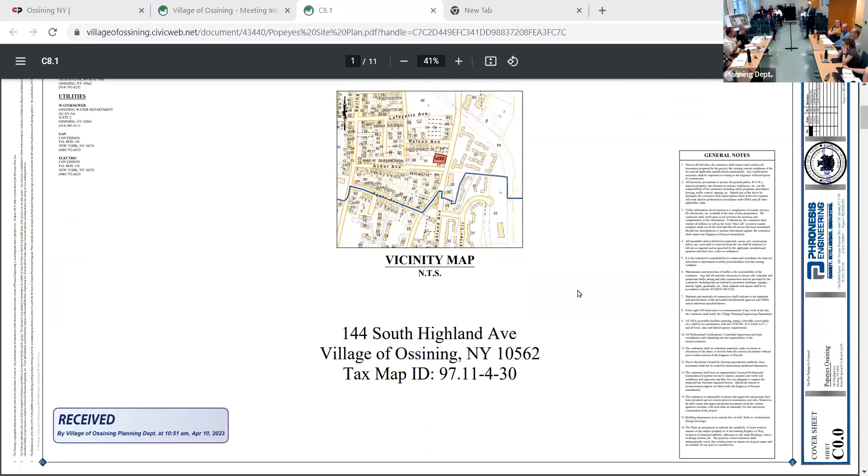Chairman, members of the board, my name is Anthony Stankinelli. I work for Phronesis Engineering, located at 1601 Veterans Memorial Highway, Islandia, New York. I'm here today to represent Popeyes in Ossining. We prepared the civil engineering plans for the project. I just want to state that the exhibit we brought tonight is just a pretty picture of the site plan that is up there. So no changes, it's just the bushes are colored and there's an aerial behind it.

As you probably already know, this site has an existing hair salon, jewelry repair, and nail salon. It has a second floor. This doesn't comply with many of the bulk setbacks and regulations. So we feel that the proposed Popeyes greatly improves the site, meeting all town code and bulk requirements.

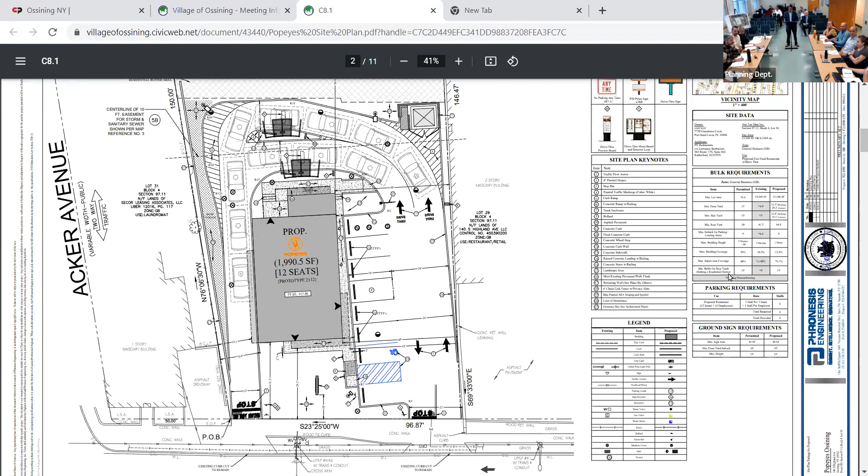The proposed site has 12 seats, a 2-lane drive-through with 2 order boards, 8 parking stalls, and 11 queuing spaces. We have great circulation coming into the site, one way in to get to the drive-through. If you want to eat, you have 8 spaces to park, eat, and then come right out of that same entrance. Going through the drive-through, you have 2 lanes, 11 queuing spaces, 2 ordering points, and a pickup window, and then one way out.

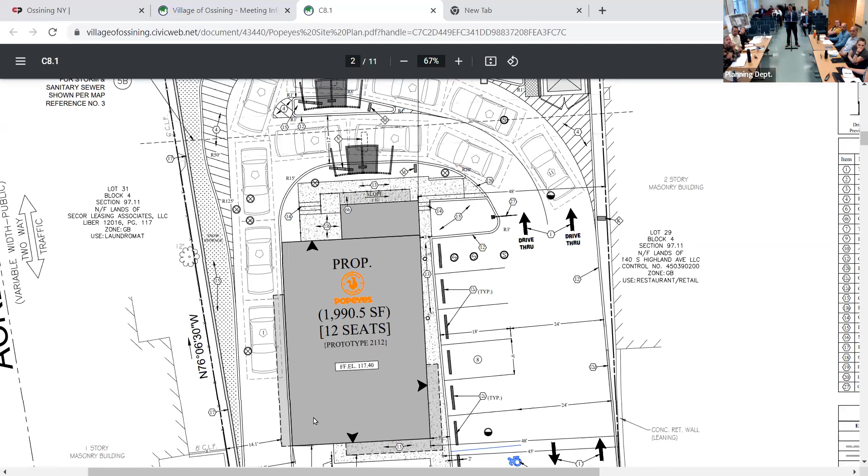Today, a lot of these fast food restaurants are doing a lot less seats. They're seeing more general traffic just coming through the drive-through and pickups. It's not shown on here, but you can see that overhang where the drive-through window is, where you pick up your food. There's actually a space in front of that - you can see how long the overhang is - for anybody just picking up, like a mobile order, so they can pull up, get their food, and leave.

We're providing brand new landscaping, regrading the site, proposing new retaining walls, landscaping, new lighting, new sewer connection with the grease trap. We understand we need health department approval, and we're also going to need New York State DOT approval. There have been some comments from the consulting engineers that we reviewed. We're confident we could address every comment. There was nothing major that we saw.

Some of the comments referred to the curb cuts on the site. We were trying to save the existing curb cuts because I'm sure you all know how long and difficult it is to go through the DOT process. So that was our intent with the drive-throughs, but it's really in their hands. When we submit to them, they're going to tell us sidewalks cracked, your curb cut, we want it smaller or larger. So we're going to be subject to the DOT. That submission, I believe, went in last week, so we're going to wait to hear their feedback.

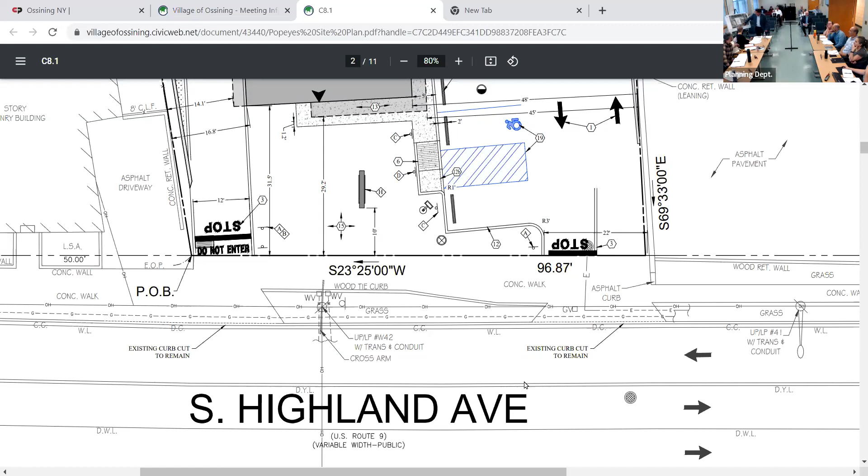We'll also take into consideration the comments from the consulting engineers about, I believe it was on the north entrance here, the existing retaining wall on the neighbor's property. There's about a 1 to 2 foot gap from that retaining wall into the drive aisle. We left it alone, that's what exists today. We didn't want to start changing the curb cuts, but again, it's all going to be subject to what the DOT wants to do.

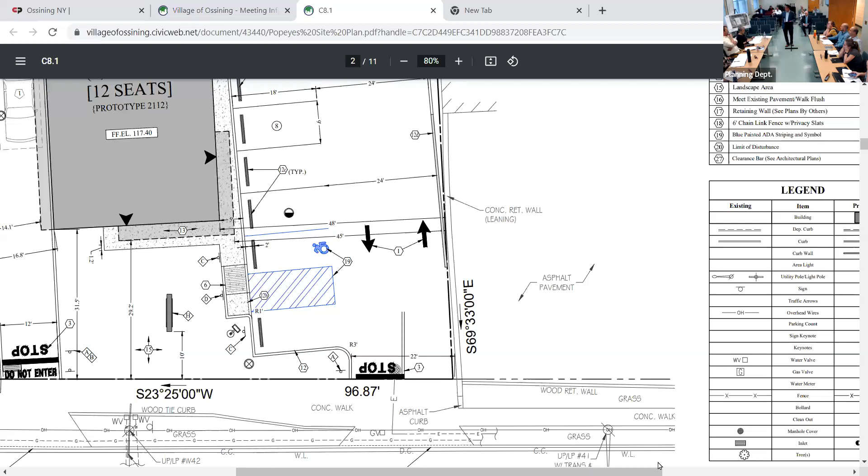New drainage system - with improvements, we're proposing a jellyfish water treatment unit, so the water's sediments and any contamination will be filtered before entering the positive drainage system on site. I just want to add, because one of the comments mentioned that drainage system was in an easement - the easement is the sewer main that runs through the site. The ordering boards are outside that easement line.

This is an exhibit, but if you go through the site plans that were submitted, there's a light - you see it better on the screen if you zoom in really close.

You see the sewer line there in the back of the store, going right through the middle of the two ordering boards. There's a 10-foot sewer easement, 5 feet on each side of that sewer line.

So one of the comments said that the ordering board was in the easement. It's actually just an overhang. We were also concerned with the pipe too, since we didn't know where those foundations were lining up. The drainage pipe, yeah, there's a footing for the ordering board above it, but the drainage pipe is 10 feet below, and the footings are not as large.

Yeah, that was my question. The thing about the easement was, because it's public drainage, it's not in an easement, but I got confused because the label said sanitary and stormwater easement.

So we met the village DPW out there on site. They didn't even know some of this existed. We went there, we inspected it, we talked to them, and we came up with the plans. That's really it, but I'm here, I could go address comment by comment if you like from the consulting engineers, but we're confident we could address them and get the revised plans back to the town.

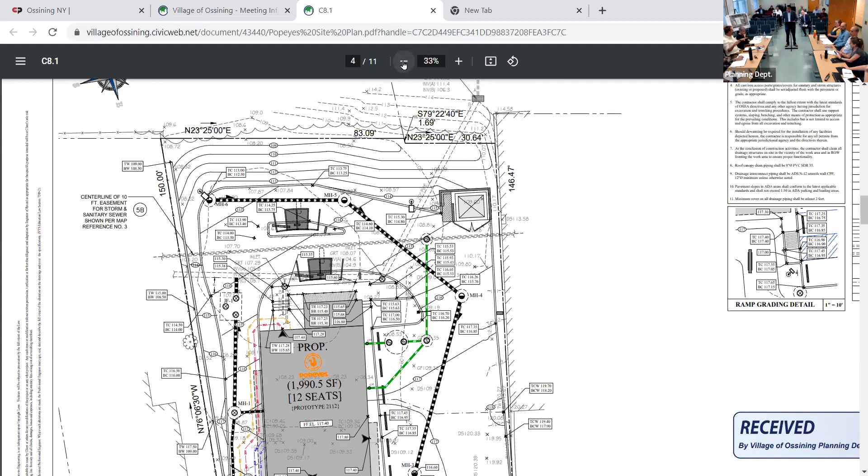Keep everything happy. I think it'd be helpful for us also to look at all of the different components of this project before we deliberate. So are you going to be presenting the BAR component, or is there another consultant who's going to be showing us the outside of the building?

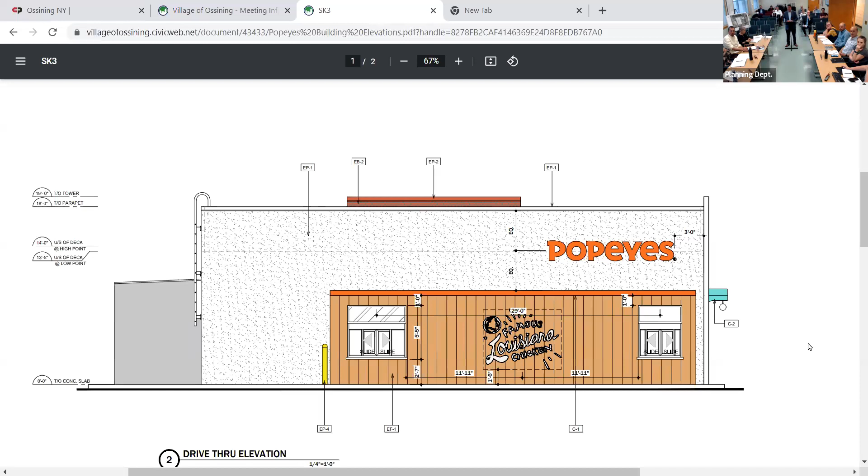So some of the comments was, so we do have the architectural elevations that were submitted. Basically, what we asked them to do was show a little more detail, call out all the different colors, call out the material types. We only got the comments yesterday, and the architect did it today. We actually emailed it over to planning at 4 o'clock today, so it probably didn't make it, but it was electronically submitted today.

So I think it would be helpful just to get to guide our conversation. I know that there were memos issued both by Valerie and Tony. Just a couple of the main points, main issues that we should be focusing in on. Maybe I'll start with Valerie, since I think that's kind of bigger picture, and then Tony.

Sure, so just a couple things. We already mentioned the county referral, we'll be undertaking that this month. For the BAR, we noted that the materials listing and colors were missing from the application, but the applicant said they submitted that, so that should be taken care of for the following month. The New York State DOT, the applicant already noted that.

Just a couple other things, the lighting, we noted there was some encroachment, so I'm sure you'll adjust the lighting and send that back next month. And then the signs, this is something that probably needs to be discussed with the building inspector. We spoke with him and noted that we were raising this issue, so speak to him and figure out exactly what's needed in terms of signs. If ultimately Popeyes wants to keep all those signs there and they don't meet the code, you might need a variance, so we're just raising that.

And then a couple other things dealing with the landscaping and lighting, as well as parking and loading. There's just some requirements in terms of drive-through facilities, so if you wouldn't mind responding to those and making sure that you meet and conform to those standards. Absolutely, thanks Valerie.

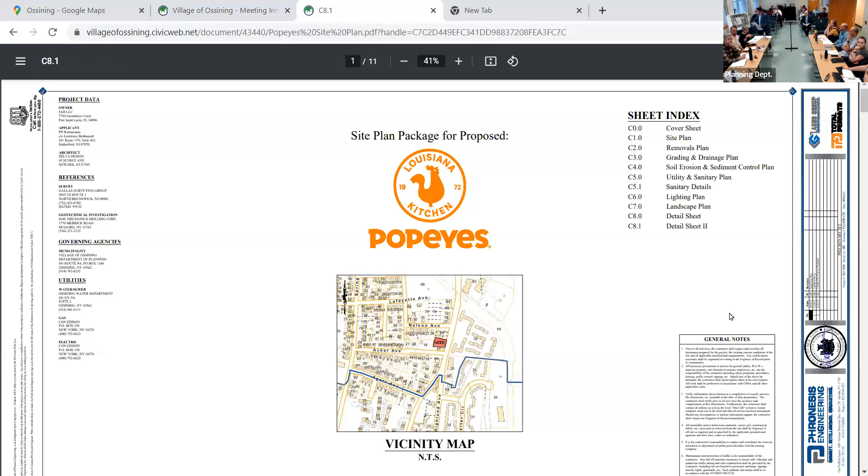I don't think this is on the site plan we're looking at, but can you talk about this green landscaping that's in front? What is that, outdoor seating? I don't know, if it's on... this is just a pretty picture, but it matches the landscape plan. And the landscape plan calls out all the different shrubs and grass areas. That's probably a better, more thorough and accurate plan to look at. This is just... so it's sort of a plaza, with some plantings or?

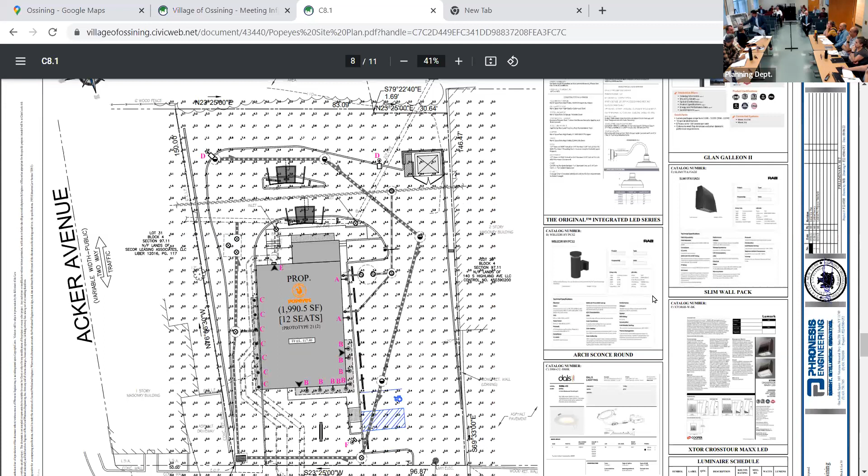There's the sign, oh my, the sign, right. So we did a couple of low lining shrubs around it, and it's just a grass area. Oh, that's some nice grass, shrubs, yeah, grass, yeah, not a plaza. Okay, everything's called out on the landscape plan. I see, okay, I wasn't sure.

That sign is not shown on any of the building elevations. No, the building elevations only show the building signs. But there is a signage table on our site plan for the ID sign, and it shows all the compliance with the code, setbacks, height, and areas. It sounds like this, so the signage, I mean we can kind of talk about that right now, because I know we're mixing DAR and site plan, but they're interconnected.

It sounds like that's being looked at by Joe. So that sign, Joe already looked at. Okay, it's the actual wall facade, right. And we just talked, so right now you're allowed to have one sign, what does the code say? Just so we can have that as part of our conversation. Let's see if I can pull that up. And that's the elevation we're looking at right now, that's the Route 9 facing...

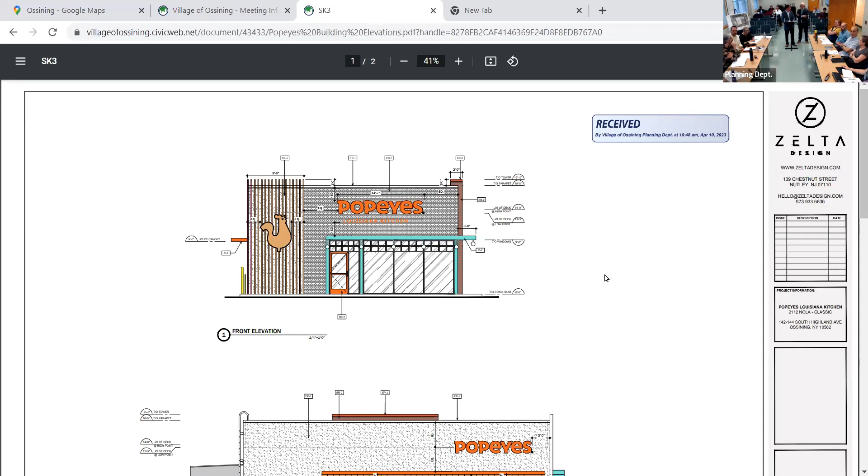Got it. Let's scroll down a little bit so we can look at both of these. So right now you're looking north, right? That's the south wall, sorry, the south wall. The drive is on the south wall there. So that's what you see when you're heading north on Route 9, and then that's the rear, right?

And the bigger issue is the definition of sign, because the definition also notes that it doesn't have to be the actual name, it could also be an announcement, advertisement, or symbolism. So that's where Joe needs to interpret. But that's for Joe to interpret, right? That's not at issue with this board right now. We'll talk to Joe and figure out, are we allowed one, are we allowed two?

Another question is, could we have a separate sign application along with the rest of the project? From this board's purview, that's meaningful from the DAR perspective, because that's integral to the facade, I think, from what we're looking at.

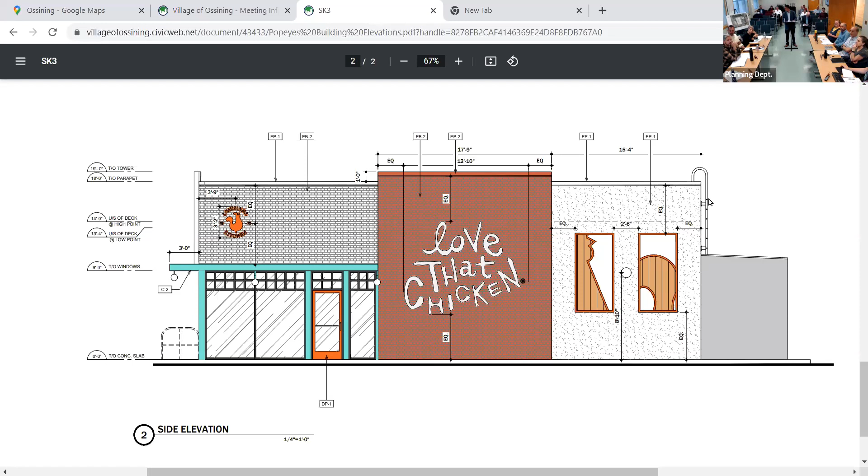The other piece I want to get clear on, I know Tony talked about it, is that there's a required driveway setback. It seems to me like we need a clear interpretation of whether or not the zoning board opinion will be required for the revamped drive. I know it's an existing condition, but it may or may not be.

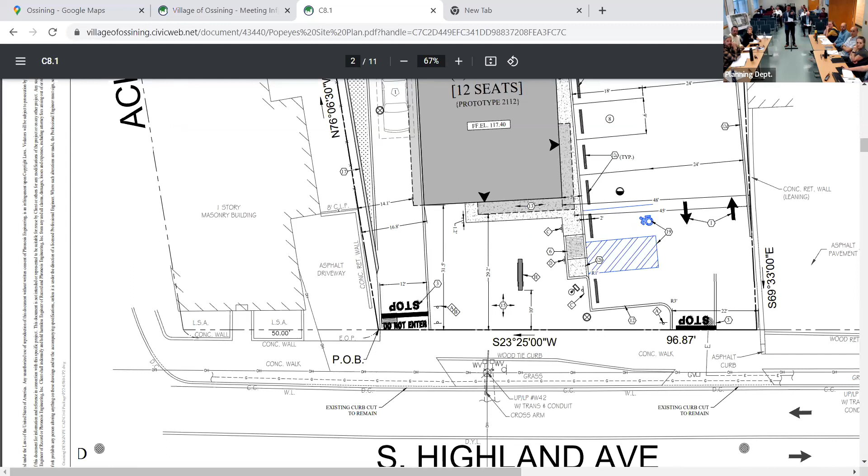Was it the northern side? The southern side, I think that's a new entrance, correct? No, they're all existing, we weren't touching that. We were using all the existing curb cuts. The one more towards the south is actually a shared drive with the neighbor. Okay, yeah, I see the asphalt driveway. So the DOT may have comments on that.

What's the level of traffic that you're expecting in the day? Based on ITE trip generations, compared to the existing site, it's less than 100 trips.

So what's the existing? Hold on, I've got a nice little graph. Weekday AM: existing 24, proposed 102. Weekday PM peak: existing 33, proposed 103. Weekend peak: existing 35, proposed 110. So the delta is less than 100, and DOT is going to consider that not a significant impact.

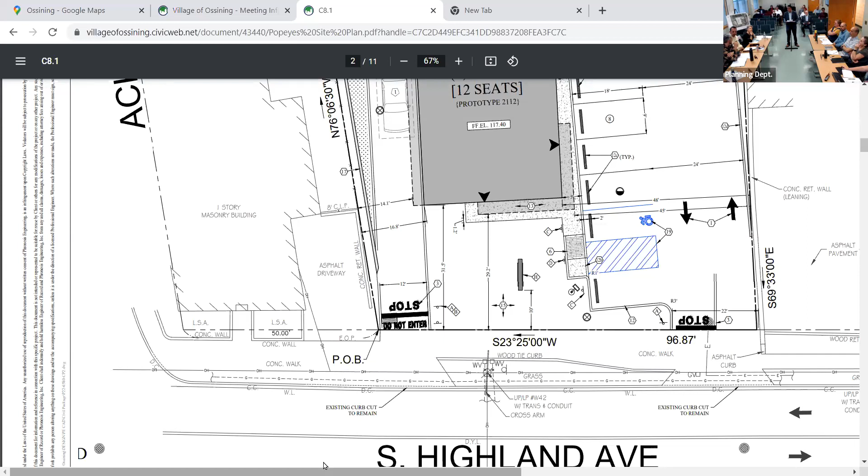Well, I'm really concerned about this because I'm familiar with the site. I use one of the tenant services, and getting in and out of that site, unless you want to turn right on Highland, is often very, very difficult. So even if the projections are that the traffic increase is less than 100 for different times of day and days of the week, I'm trying to envision how a steady stream of traffic is going to come in and out of this site.

More so getting in or getting out? Particularly getting out, if they want to go north on Highland Avenue. What's the average amount of time that a drive-through customer spends in line?

At Popeyes, do we know? Probably like 4 minutes, 2 minutes. Yeah, they have 2 ordering points, and now they have more people working the drive-through rather than catering to people inside, so the goal is to move them out.

I don't know if this is DOT's purview, but it's a concern I have. DOT is gonna tell us whether they feel this should be restricted to right-outs only or not. They're gonna do their own investigation and study, go to the site, and then come back and give us a whole laundry list.

That's typical process. Are they gonna be required to do a traffic study, or are we gonna accept just the traffic report they give? Are you gonna do a full-blown study? I don't even believe we received the traffic report. I'll do that. So there's no secret process here.

It's a type 2, but under site plan you can look at traffic issues if you're concerned from a site plan standpoint. I'm not sure what DOT is gonna ask them for. The threshold is typically if you're increasing more than 100 trips, then you should do a study.

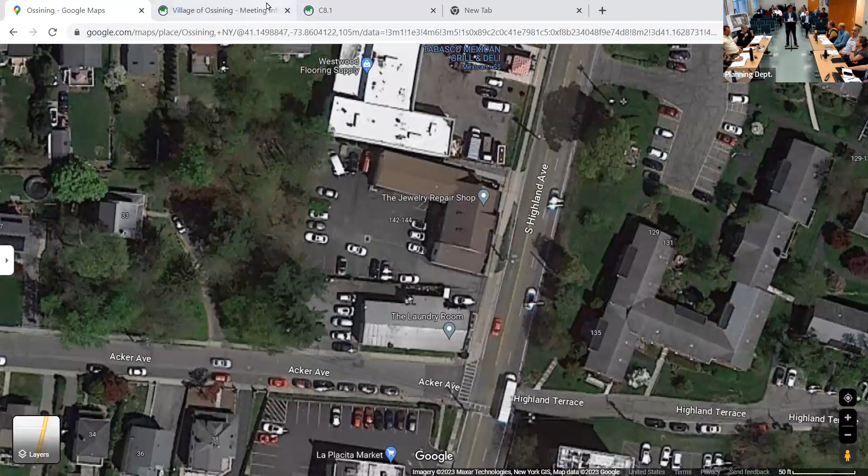I have a question about the parking. So you have how many spots? 8 stalls. And I know this is probably to the code, but where are employees parking off-site? How many employees are gonna be there versus customers, the parking calculations? So the required parking for town code.

So yes, it includes 4 employees, so there will only be—how many spots are there, 8? 8, so only 4 spots for guests. Correct. They don't anticipate a lot of dine-in customers today, most of the orders are mobile and pickups. That's why the building is only 1,990 square feet, with only 12 seats inside the restaurant. That's why they put the 2 ordering points, and we have 11 queuing spaces in the back.

Yeah, it's right, the code requires seats, not square footage. It's based on seats plus employees. I think it's 3 seats per, right? It is, yep, three seats. And then if there was ever a change, if the structure was ever repurposed or reused, they'd need to revisit the site plan and the parking.

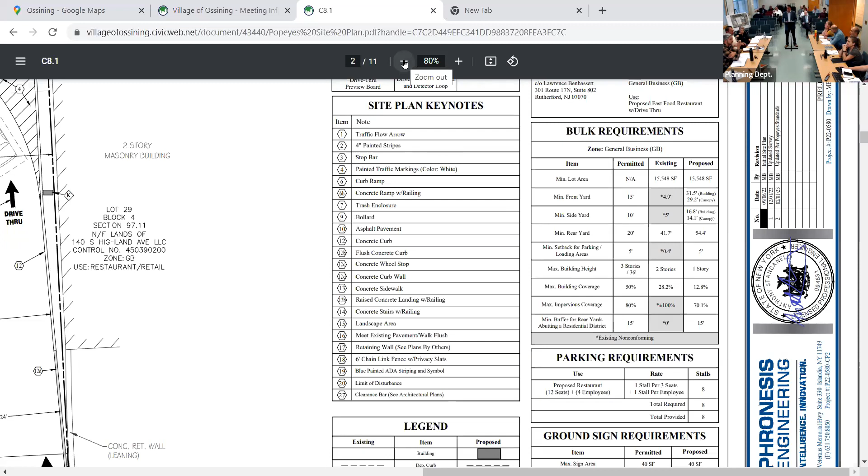Okay, so do we have any other kind of initial questions right now? Because I think there's a public process here. Also, we haven't talked very much about the BAR. I know we talked about the signage, which may be the more salient issue.

One thing I think would be beneficial to see is a rendering or superimpose of what the completed site will look like in the existing space, like with the building. Yeah, it doesn't have to be 3D, just superimpose, build it from the street, what it would look like compared to what's existing there, including the adjacent properties on both sides.

Maybe even the view from Acker, which is a more residential street as you come up, so maybe that view would be a second view to see. We didn't talk so much about the impact on the adjacent residential, other than the buffer, which is substantive. There was a lighting plan on there, so.

Yeah, Valerie, I need to get some comments on the lighting. Yeah, there was a slight encroachment on the neighboring properties. They said they were gonna adjust the lighting, but that was one of our concerns.

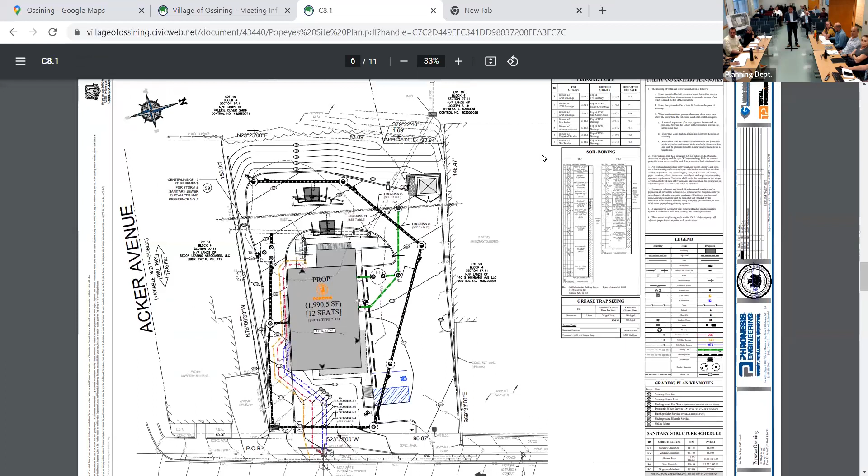That's not a problem, we can update this. I think the other ones, there's some really intense brightness close to the building, around the perimeter of the building, I think those are like 10-foot candles. Well, it's directly underneath the fixture. Yeah, that's almost in every situation, gives the glow. Can we look at the lighting plan while we're scrolling through here?

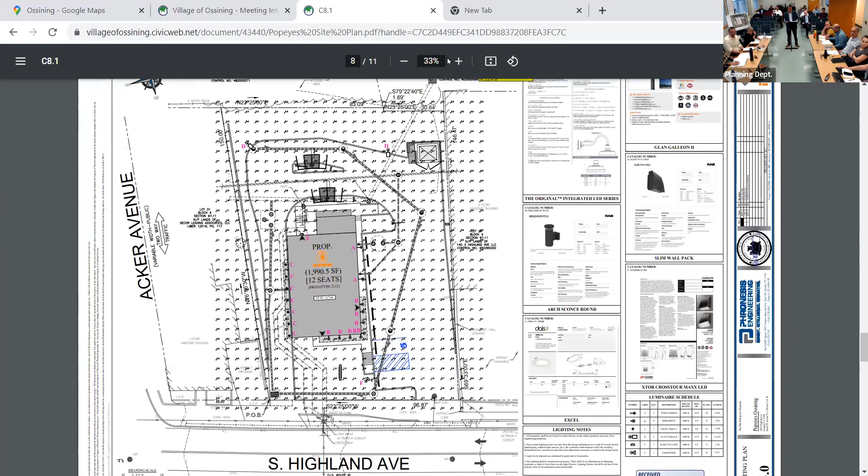That one I'm gonna have to look at. The lighting fixture in the corner there, can you tell me the CRI, like serial number and model.

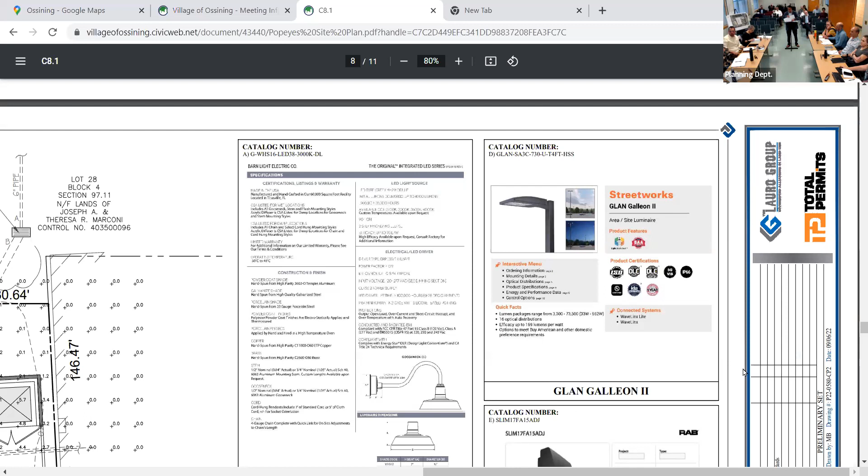We typically always have 3,000 or less. That's a lot of the towns and villages that we're marketing all over, they don't like the bright blue lights, nobody does. And they are full cutoff, dark sky compliant. So the lower the Kelvin, the warmer the color? Yes. Okay, so anything above 3,000 tends to get a little blue. None of the towns want that.

Yep, 3,000 K. I think it would be helpful to see that clarified. Yeah, we could make sure there's no light trespass. With LEDs now there's all different types of shields and everything we could use, it's like razor sharp.

And honestly, that in conjunction with the rendering, even like a nighttime rendering of this, since this will operate a lot at night, that'll be the impact it has on the community, so that might be helpful to see as well. I realize that's a piece of art, not a technical document, but as close as it could be.

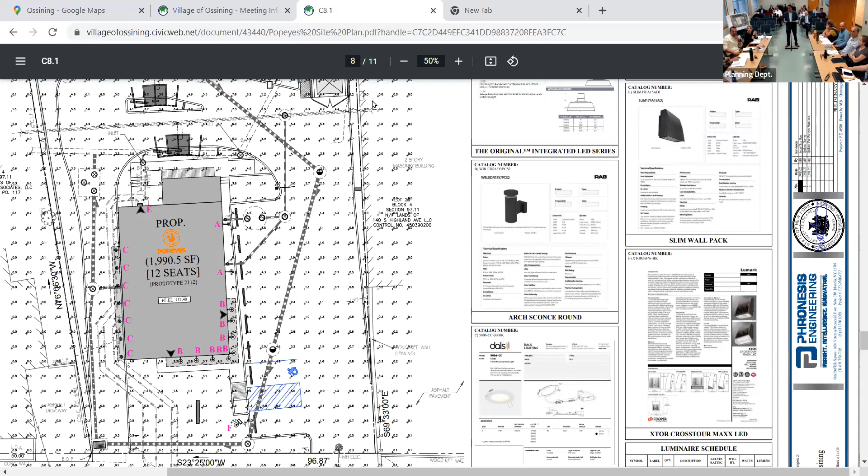Okay, so with all of this in mind, any other comments on the BAR? Other than your comment about seeing this in context, I think that's it.

So with all the conversations we've had so far, can we maybe have a motion to open up the public hearing here? Aaron, motion to open public hearing. Michael Aronson, second. Any objections? No objections, we're now in a public hearing.

So I'd like to first open it up, if there's anybody in the room who came here to speak to this application, come on up and come to the microphone, just announce your name, and the floor is yours. Hi.

My name is Mary Langen and I live at 133 South Highland, which is directly across from the site. I've lived there since August of 1998, and there has been nothing but issues with pulling in and out, making left-hand turns out of either Acker Avenue or my complex, which is directly across from Acker Avenue. This spot is literally directly across from our complex, and the amount of traffic right now—every person that comes to my house says we need a traffic light here. This is going to be terrible for the neighborhood, I feel.

We had a Kentucky Fried Chicken, but you had to get off of 9A or Route 9 and then into their parking lot.

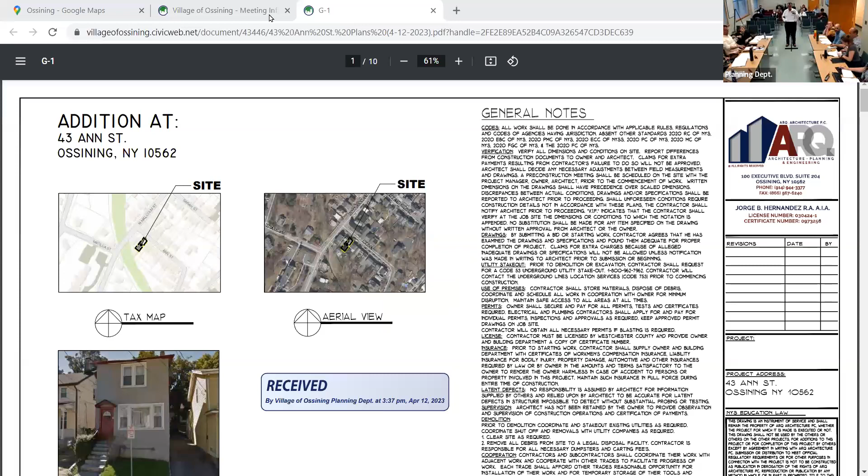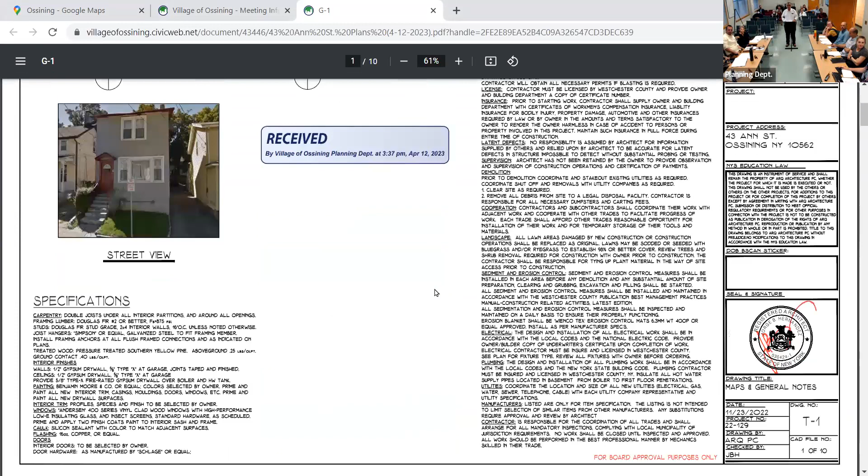If you move forward, we just put in a small addition at the rear, above the second floor above the existing kitchen. There's not much room. We obtained variances already, so it's a very straightforward addition. We have the siding - I believe A5 shows the existing conditions, and A6 shows the proposed condition. So that's basically what we're doing in the dining room, with a little covered entry to protect from the weather. The second floor has a...

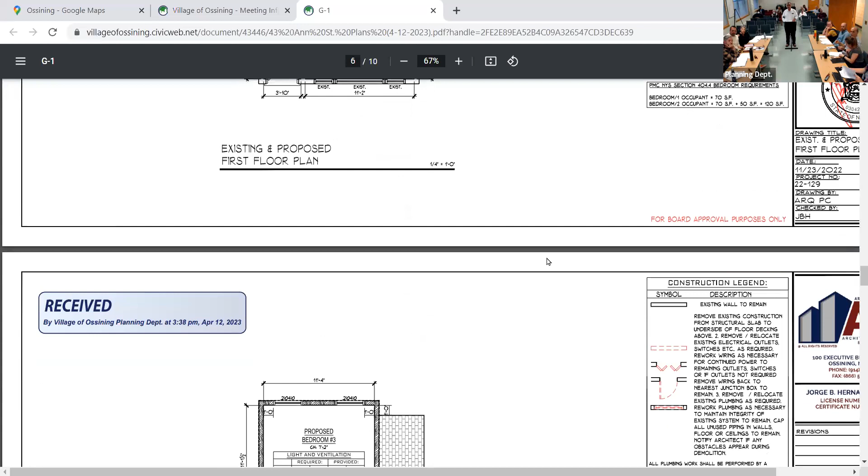Yeah, we can keep going through these plans. So that's basically the addition - the third bedroom that's going over the dining room, plus that little covered portico roof in the back.

How much square footage are you adding in living space? I believe it's... I can record it. This says 105 for the bedroom, right, plus the stairs. So, 140. Modest. Yeah. Can we look at the elevations?

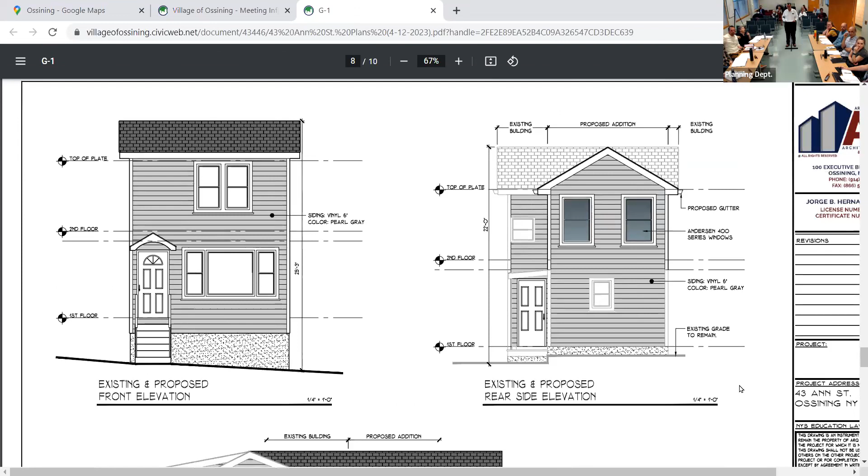So you are changing the siding everywhere? Yes. What are you doing, 4-inch vinyl siding? It's 6-inch Pearl Gray.

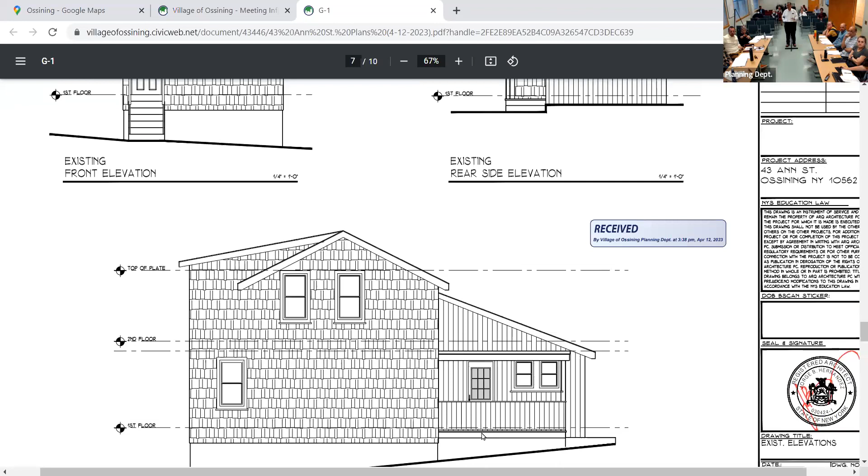So that cedar shake siding, the shingle siding that's on a portion of the house now, is that all going to go? At the front, yes, and also on the sides. That's existing, that's existing. I think there are pictures as well at the end.

So you're kind of taking the top of the existing front volume and bringing that straight across, and that's the pedimented roof that you've got in the back there. Okay.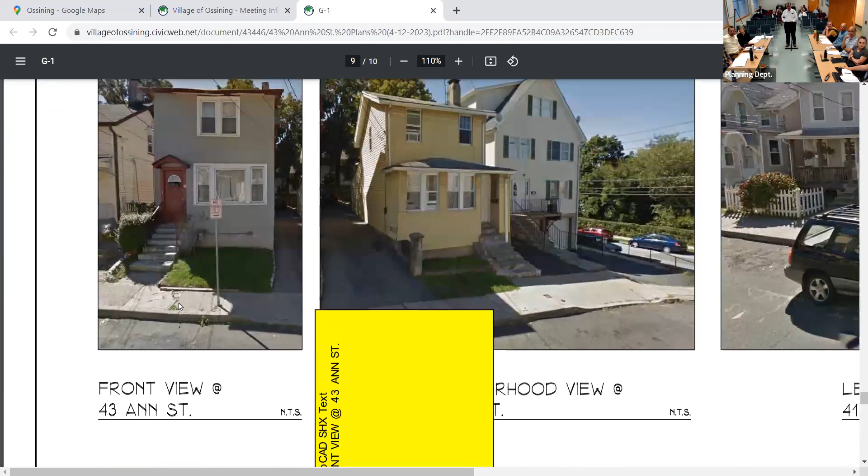And I think the materials are clearly listed. The roof, you're doing the roofs throughout. Yes, you're practically putting a whole new roof structure on the house.

Okay, board members, questions? Know the roof materials? Oh, it's right there. Okay. Questions? I think it's pretty straightforward, it's all there.

So can we have a motion to open a public hearing? Bobby Tucker making a motion to open public hearing. Brenda Burbach, second motion. Any objections? No objections, the motion carries.

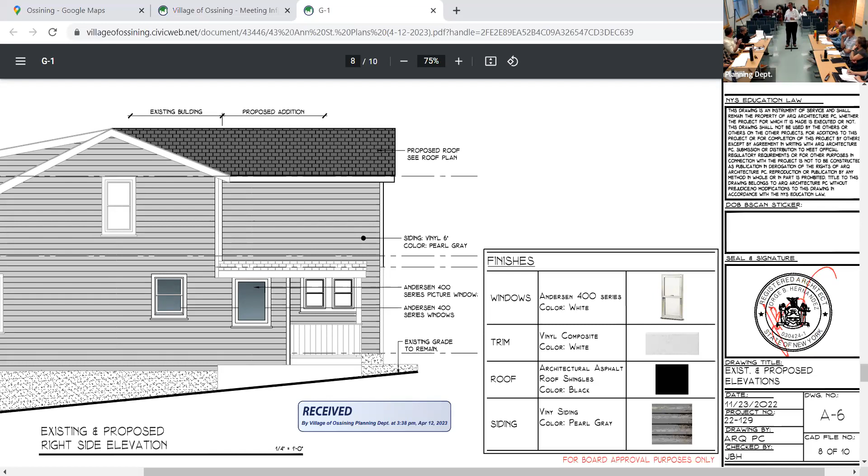Is there anybody here from the public to speak to this application? Yes. Okay, and so as you come up, you can introduce yourself and your place of residence and you will speak.

Good evening, my name is Nelsa Ogilvy. I reside at 17 Pine Street, Ossining. I'm here because my family has been residing at 17 Ann Street since 1943, and the condition of the neighborhood has deteriorated as our neighbors had died because the existing building had been sold to absentee landlords. So therefore, there is no interest in maintaining the community.

I have problems because people park in front of my house, throw garbage in my garden, pee bottles, condoms. The traffic is horrible. And as you can see, I'm disabled and it's very difficult for me to walk. Even when the garbage pickup comes, they throw the garbage containers all over the place. In my condition, I have to walk all over the neighborhood to get my containers.

Traffic is horrendous. If a person wants to improve their home because they want better condition in their home, I don't have a problem with that. The thing is that the number of people living in a small area is increasing because there have been rentals. It's not for family, it's for rental, and that is my concern. That the environment of my neighborhood is not improving at this particular time. Thank you very much.

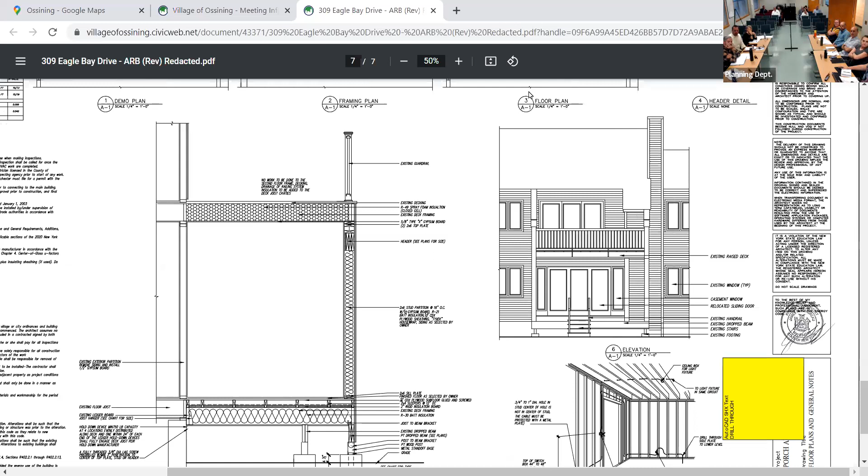Just for point of clarity, the stairs, posts and pillars, all of that is existing to remain. Really what you're adding is the glass and a little bit of insulation. Yeah, insulation and whatever else is on the plans. I'm not an architect, but they put everything into the plans.

Yes, there's a sliding door, it will be relocated because now it's in the back of the condo, and that door will be relocated to the back of the deck. Okay, board members, questions?

Is there a roof being added over the deck? There is a floor above me, so there is a deck above that deck, so there'll be insulation put in there, but that deck will remain.

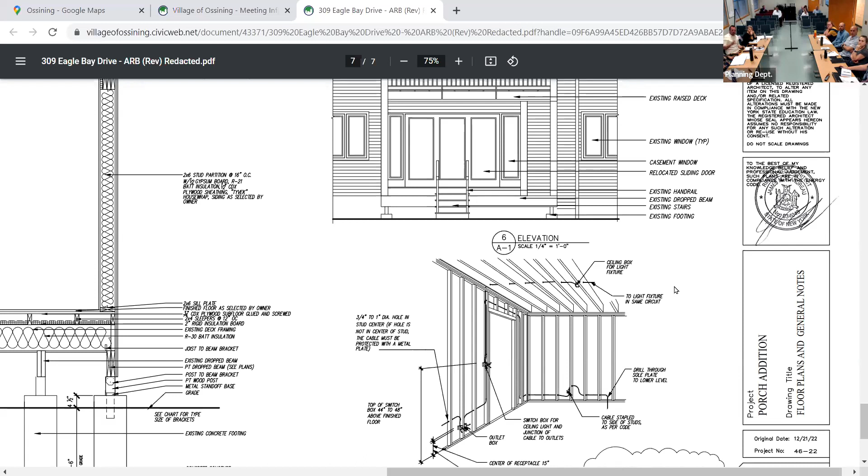So the closing in is of this, the deck above is the... Right, so we'll assume, because they're showing insulation in those joist bays, that's waterproof. But from the ARB perspective, we're not looking at this from a performative component perspective. Were there any photographs submitted in the application?

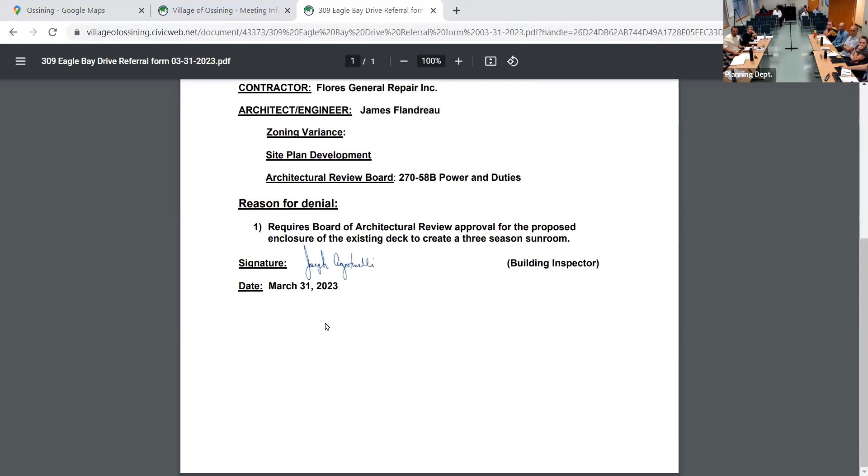I'm not sure about that, I'm going to double check, but I don't think we saw any. I think there were a couple from the outside that the architect took, a couple of pictures. There you go. Hold on, whoop, I'm too fast. That's from the back. Oh, super helpful.

So we understand what we're looking at here. Okay, wait, you had it. Go down a little. Get a sense of it, right? And there's a difference between these two photos.

Okay, at the bottom, I'm at the bottom, not the top. But above me, you can see there's another unit above me, but I am enclosing that back part. I think this photo also shows that it's a pretty minimal intervention, and it's also fairly visible even from its own property. Yeah, very well shielded.

The deck above you belongs to a different owner. Yes, I see. And we have materials in the plans, just, you know, like the windows. Can we go back? Sorry, making you go back and forth here.

Maybe the detailed section. Does that show the new siding? It looks like there's a small area of siding that they're adding in.

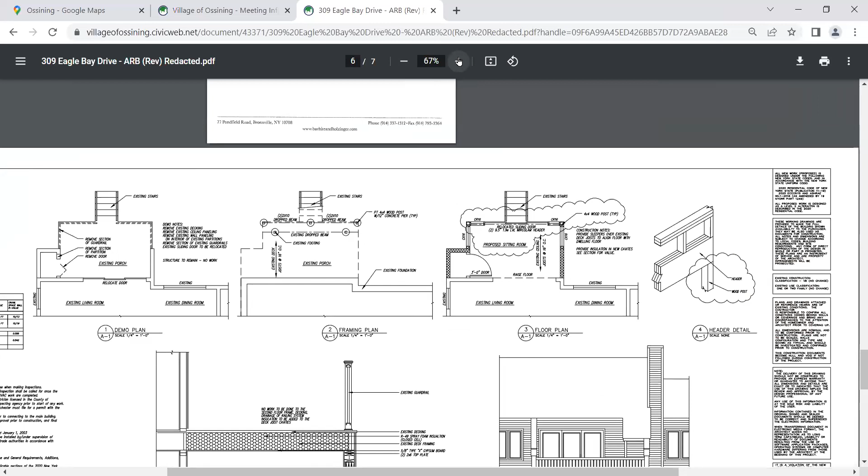Are you relocating the existing doors, or are these - I'm relocating. There are sliding doors and two fixed panels that are facing the living area, the living room. And those panels will be relocated to the back of the deck.

They are the existing - let's do it on the others. And so it'll just be open, or you'll have new doors, just - do you have a new doorway between the 3-season room and the rest of your apartment, your house? There'll be new windows. I'm not sure I understand the question.

Let's just scroll to that plan so we can kind of see. So if you're moving the existing doors that now go out to the deck, to the front of the deck, keep going up - right, what are you replacing those with, between your living room and...? It'll just be one big open space. It'll just extend the flooring.

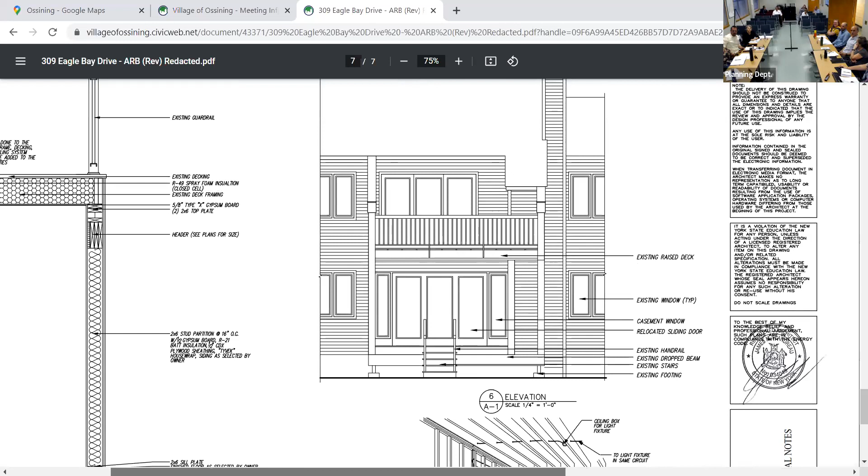Oh, so it's not - there's actually a plan, okay, the plan of the space. Because I think there's one other thing we just need to clarify, which is related to siding.

Because it does look to me like there's the windows in the front, but there's a couple sides of this enclosure - the side windows, yes. If you can keep going up and zoom in, yeah, on those three diagrams up there - I think those are kind of a good narrative of what they're proposing here.

Right, so you can see where the existing porch was, where they're raising the floor, they're putting those side windows in, but also with that diagonal hatch - is this standard wall construction? If I'm reading that correctly.

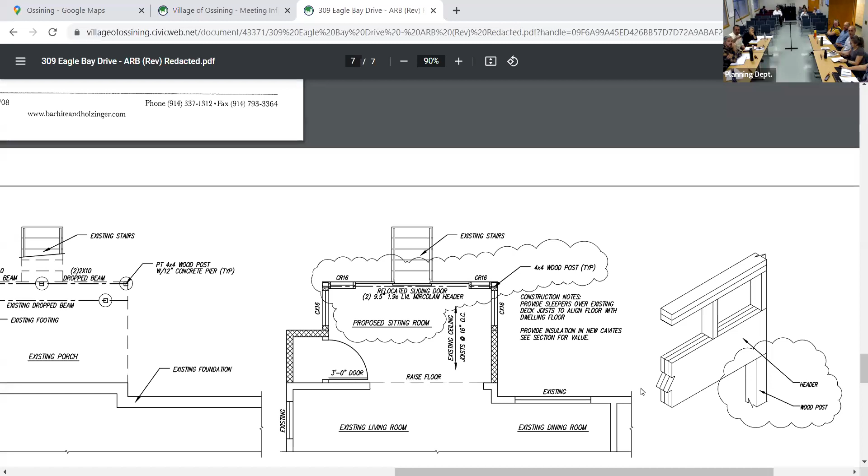If we can see the existing - sorry, side by side, if you can see those two drawings. Oh, so there's an existing outdoor - yeah, I got it. So it's like there's a closet or a shed, and that's going to be rebuilt. Yes, that's a closet, like a tool shed. It'll be made into an indoor closet, so to speak.

All of those - what I was thinking was new siding is not, that's all existing. There will be new siding somewhere, but it'll match the existing. All right, I think I understand this better. So it really is just glazing in the existing openings. Yeah, okay, all right, that's enough for me.

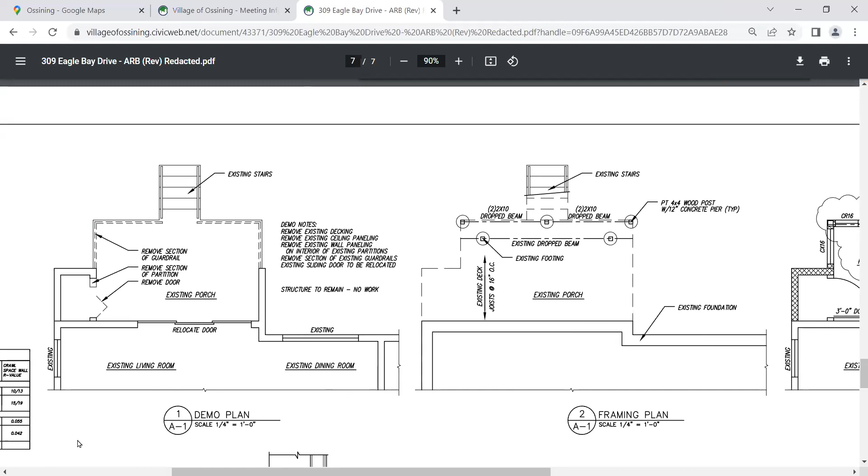Any other questions from the board? Sorry, it took a second to get there, but we're there.

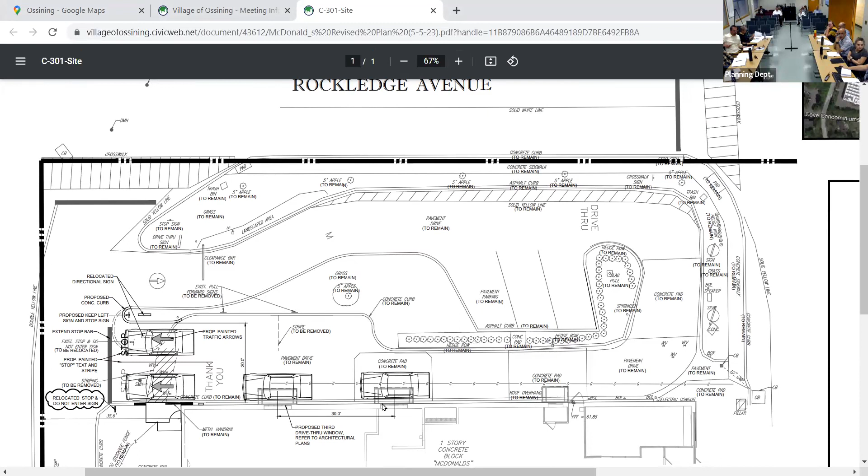Nothing to that. Okay, all right, so can we have a motion to reopen the public hearing on this application? Aaron, motion to reopen the public hearing. Eric Talbot, I second the motion. Any objections? No objections, the motion carries.

So we'll start off. Is there anybody here from the public to speak to this application? I don't see any hands in the room. All right, so there are no new hands from the public.

So just to summarize before we close the public hearing, we've looked at this as a site plan review. It's pretty straightforward, we talked about it. So can I have a motion to close the public hearing? Make a motion to close the public hearing. Brenda Rohrbach, second motion. Any objections? No objections. The public hearing is closed.

Okay, so we've been through this. I'm just going to ask staff one more time, anything that we haven't yet discussed or asked that we should have? Okay, but I think this is pretty straightforward. Are there any special conditions that we should be calling out, in terms of responses to the checklist that was provided either Tony by your office or Valerie? All my conditions from that.

Okay, so we're fully there. So this seems pretty straightforward. Based on what we've seen, we have a motion from the board to approve the application.

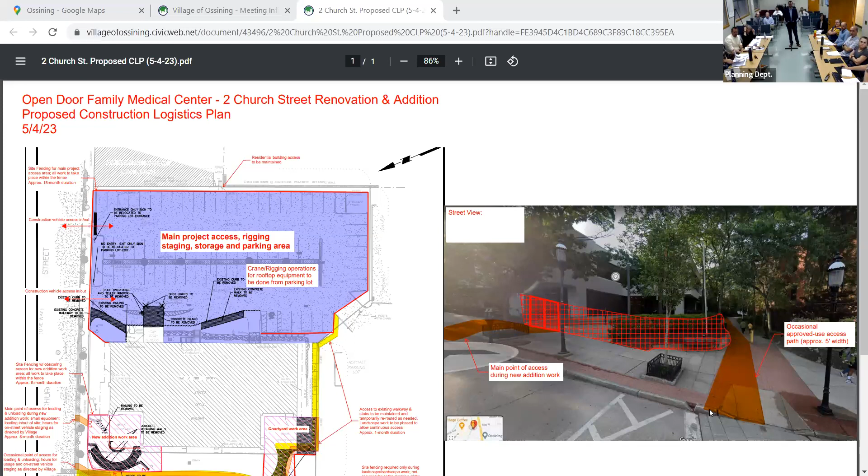I may have to step closer if I'm pointing at things too far away. The blue highlighted area is the existing parking lot on Third Street, which will be the primary access point for the duration of the project. That will be access for contractors coming in and out with materials for the renovation of the building, just in the hatched area below. So that will be the main point of access to the majority of the project.

There are a couple areas down on the south end of the building where work will have a bit more impact on the public and surrounding areas. Scroll down a little more, please. Perfect, there. On the bottom left is where the addition to the building is taking place.

During that part of the project, we will have site fencing up to the existing sidewalk on Church Street and out to the Old Croton Aqueduct walkway, protecting the public from accessing the site that way. There will be periodic access going in and out of that fenced-in area, and periodic encroachment into the Old Croton Aqueduct walkway.

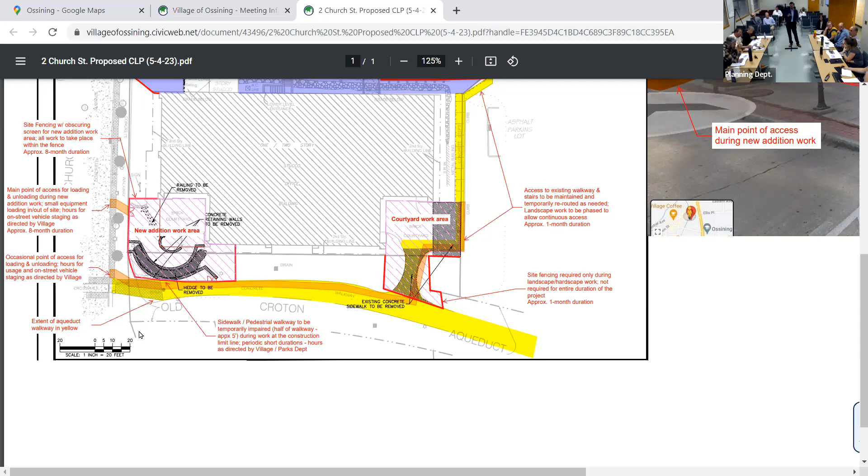We will work to limit that as much as possible. I don't foresee a need to block or take up the complete walkway. In the picture to the right, the thought would be that if and when needed, the fencing would move out to about that yellow bollard that splits the walkway in half, so it might cut access in half for a period of time.

We're glad to coordinate with any town officials, whoever the point of contact would be, about when we need that access and for how long. At this point it's a little difficult to nail down. We foresee the entire construction of that addition and hardscape area to be about 8 months of the overall project duration. The overall project, the renovation and addition, is about 14 months.

So that fence will be in place for 14 months? The fence you see in red in that graphic there is about 8 months. And the parking lot would be used for construction staging that entire time as well? Yeah, that would be for the entire 14-month duration as we renovate the inside of the building.

That graphic shows the right-of-way going all the way out to the curb. I can imagine that could be shifted so you're not using the handicap ramp. Yes, the thought is that any rolling equipment would want to use that curb cut. If we had a truck unloading and needed to roll something, we could go to the curved area and put something on the curb for access, or just position the truck appropriately.

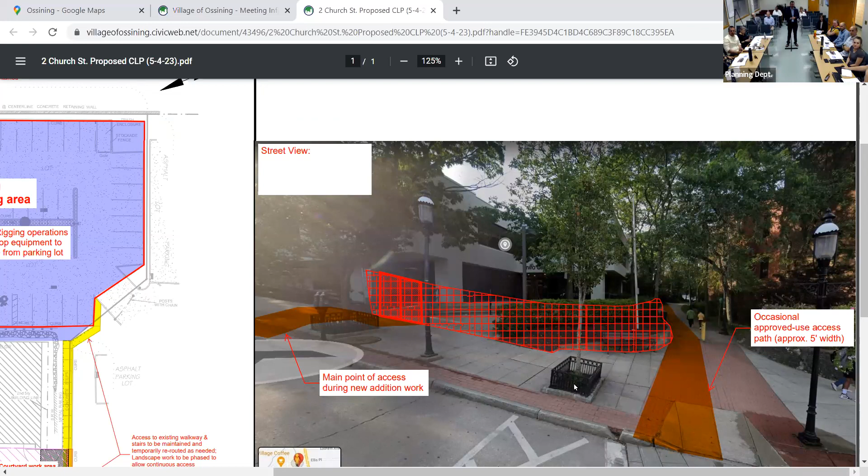You're not covering away a lot of that tree, actually -- the picture doesn't do it justice. It's up almost to the street, and then you have the sidewalk, and then you'd be getting into the project site. So there shouldn't be a need to impact that tree.

I have a question, maybe this was brought up -- is the building going to be occupied during the renovation? No, it is not.

Do you foresee, for instance, with deliveries coming off the parking space, having to take up that parking space for any length of time? I would almost coordinate with the DPW when you plan on doing that. There might be an issue where you don't have that space in the morning, and you might have a delivery truck circling around doing a couple of laps.

Our thought is specifying delivery hours as early in the morning as possible, to try to be out of the way of the public. We'd limit deliveries to those times, use that spot for a short term, unload what you need and get out of there.

You're not using a crane, are you? Did you foresee crane usage or positioning of a crane? It will be a structural steel addition in that area, and it'll be a very small crane lifting the structural members into place for the addition.

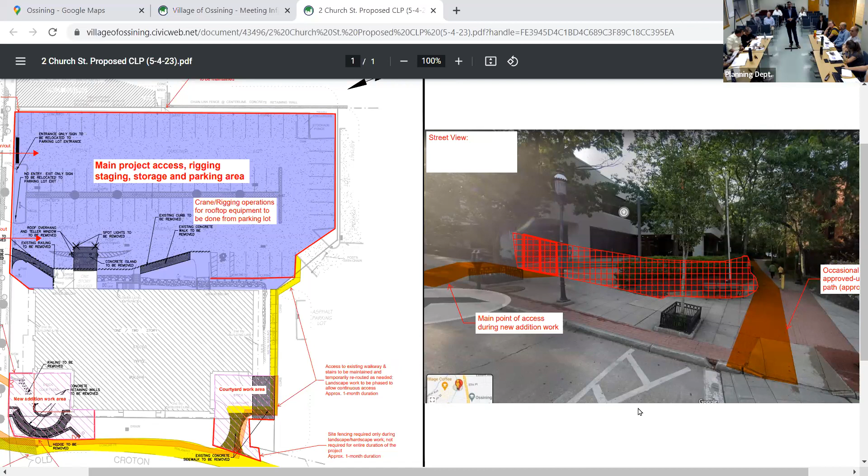But it would be within the site, within the house. They're not gonna park it on the street, so you'd be using a crane there. None of that—there will be some cranes lifting rooftop equipment onto the building, from the blue area, from the parking. So I don't foresee a need for a street position crane.

How are you getting the equipment on the other side of that fence? What's the access, this red line? Yes, that was again from the parking spots, for some very limited access—beginning of the day, moving equipment in and out, and then staying confined to the site fence during the day, and then at the end of the day, maybe if there's equipment that needs to unload.

Is that their plan—I'm sure that sidewalk is gonna be damaged during the construction. So there's a reconstruction plan. We would, yeah.

Well, we can assess the existing condition and document that. It's probably your responsibility anyway, right? Yeah, the property owner's responsibility to do the sidewalk in front of their house. We have to do it. I don't know about the sidewalk itself.

But what I'm envisioning happening—and I know we're getting into a lot of detail—is there'll be a pre-construction meeting with the stakeholders, and there'll be more of this fleshed out in the course of doing that. We'll look at a pre-construction condition survey, and we'll document what the baseline information is, and then we'll have a basis to figure out what needs to be restored, if anything, as a result of construction. So that's not all explained in this. I'm just trying to give you a general idea, but there's a lot more thought that will go into this as we get into the actual construction process.

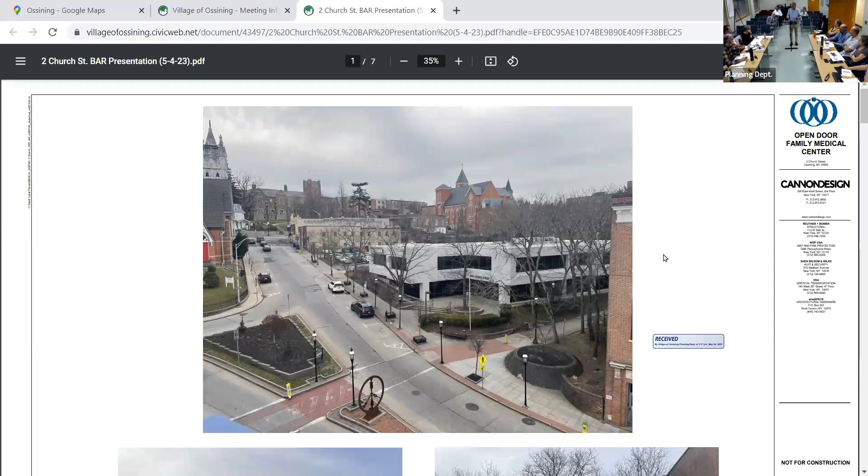Hi, I'm John Reed with CannonDesign. Address is 300 East 42nd Street, New York City. So we came back with some enclosure information for the mechanical equipment, and we have some drawings as well that will show you the massing of it, the scale of it. We used the same drawings we did previously.

So again, these drawings are pretty much up in the air, looking down at it. You just saw the existing condition. Now you're seeing the new enclosure. There are two areas of enclosure. That's the most efficient way to mechanically serve this medical space.

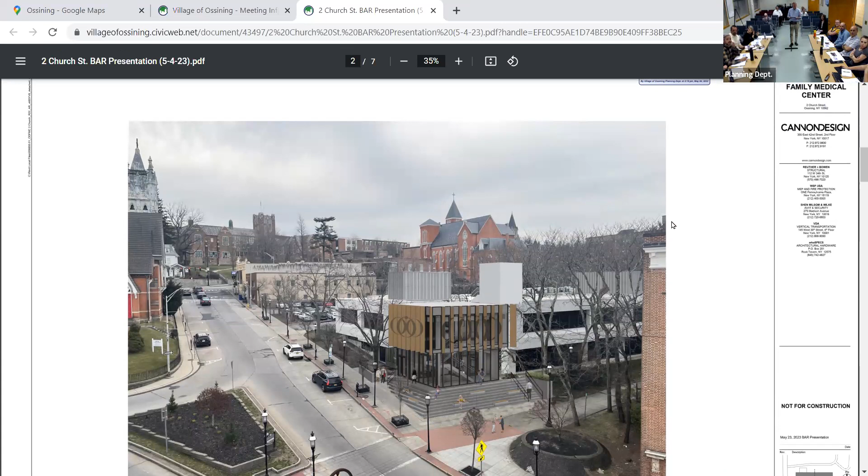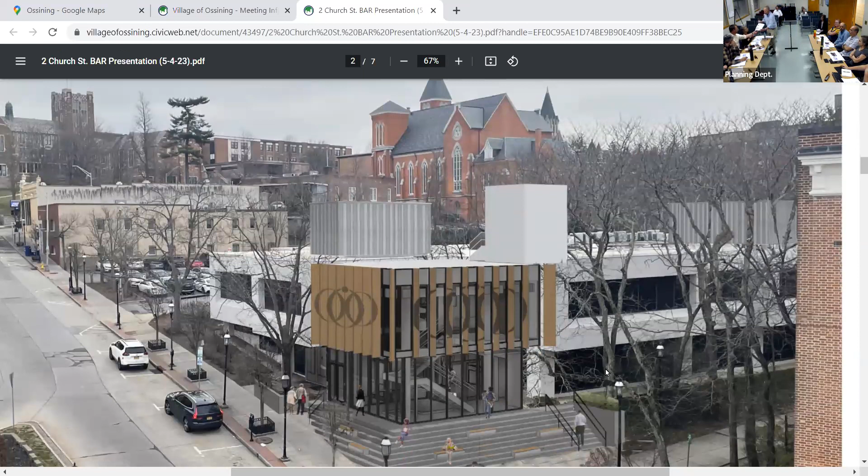The materials that we're using is a sort of vertical enclosure. I'm sorry, I don't have a piece of it. So it is this, excuse me, it is this right here. And this is the color, which is a shadow gray.

We selected this color because when you look up at the sky, if it's white, it pops out. If it's black, it pops out. You pick a sort of shadow gray, about 20% gray. We found that that's the most efficient way to hide the mechanical equipment.

Again, this enclosure is bigger than the mechanical equipment. You need about 3'6" to service the machinery. So it's a little bigger than what we previously showed, but it's now completely enclosed with a closure system. What's the height of it? It's 10 feet above the finished floor of the finished roof height.

We can go to the drawings. It's listed on the drawings if you want to see what it is. Let's stay on that image for a second, because we're focusing on the top. Sorry, you really can't do more than about three things at one time. I need a few more.

So, we're looking at the one enclosure in the front, which will be more prominently situated, but we're also looking at, is it three other bulkheads? Two - one in the front and one in the rear of the building. So that's just the tree breaking up the view. Correct. Okay.

The white area in front is the elevator, and we kept that the same color as the stucco of the building, because if you look down at the base of it, it really is the lower level wall just extending up. The building has areas on the second floor that step forward of the ground floor, and so we're maintaining that ground floor's position and just running it up to make the elevator bulkhead.

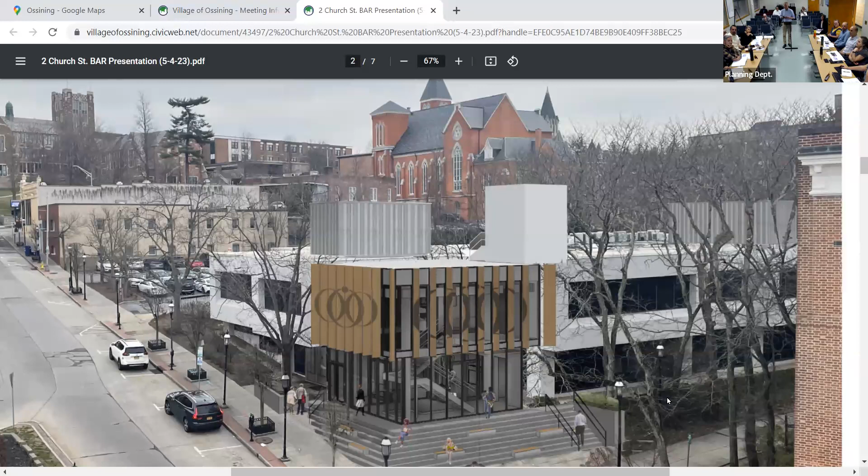So actually that was maybe a misunderstanding. If we look at that horizontal volume of the original building - it steps that forward, the bulkhead steps forward, but in this image it almost reads like it's flush with that. It's not. Good point, feel free to clarify. All right, yeah, no, that's totally fine.

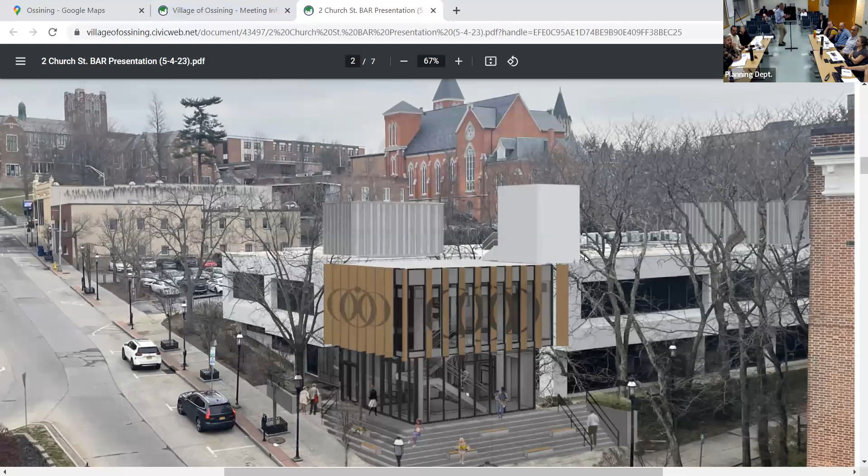So you can see, it's very difficult to see, but this second floor is turning the corner and going back. The fins that we have cladding the second story are blocking that edge. So it goes back about 3 feet, and that 3 foot layer is co-planar with the base of the building - that's the volume that rises up to form the elevator bulkhead. And that's why we kept it that lighter color.

Can we look at the orthographic elevation of this? Sure. So that's the street elevation. Let's go to the one that's - you can see the offset there. Right, shadowing. The bulkhead is in line with the first floor and the second floor steps out, and then the fins are proud of that.

So it's going to be 2 drawings down, I think, to get to the elevation. One more. One more, 3 drawings down. So there it is. Now scroll, if you could, a little to the left. So there you can see the base of the elevator and how the second story is coming forward from that.

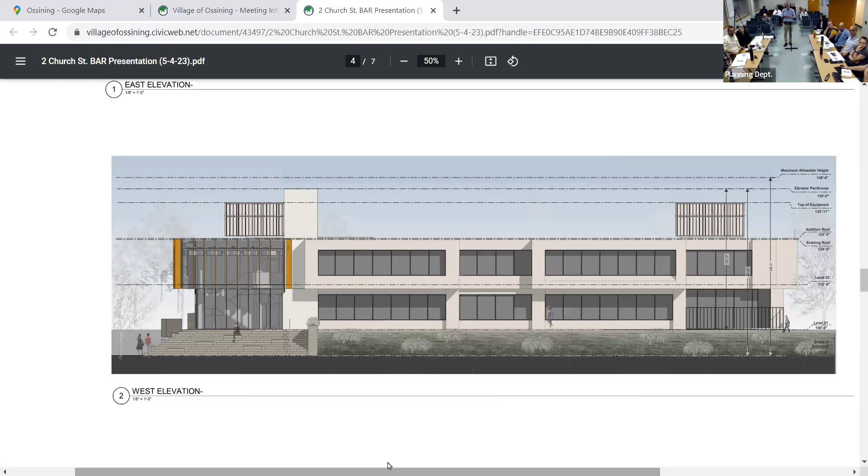Yeah, that's super helpful. I think there was something with the rendering that made it look like it was sitting out in space, but these images are super helpful. They're also showing the scale of the two, so those are scales, so you have the data points there.

Right now, because we were talking a moment ago about the heights of all of these, and I think right now we're just looking at the heights from a massing and BAR perspective. So the very, very top line is our maximum line. It's hard to see in this drawing, but that dashed line at the top - we're significantly below that line with the elements in our roof.

I just wanted to point out that, as Jerry had noted, that 48-foot maximum we've taken from the elevation of the aqueduct path. So it's actually quite below the first floor of the existing building, so that we could demonstrate it, given the slope of the site, from the lowest possible point of measurement.

I was just gonna ask, what is the other mechanical structure to the right in the building? It's another set of mechanical - it's there already, no, it's a new one. Because it is a medical office building, the most efficient way to feed it happened to be from these two ends and move to the middle. We could have put a much bigger one in the middle, but it wasn't as efficient or as economical.

And it'll have the same cladding, exactly the same. And we picked the vertical because we thought it went with the elevation.

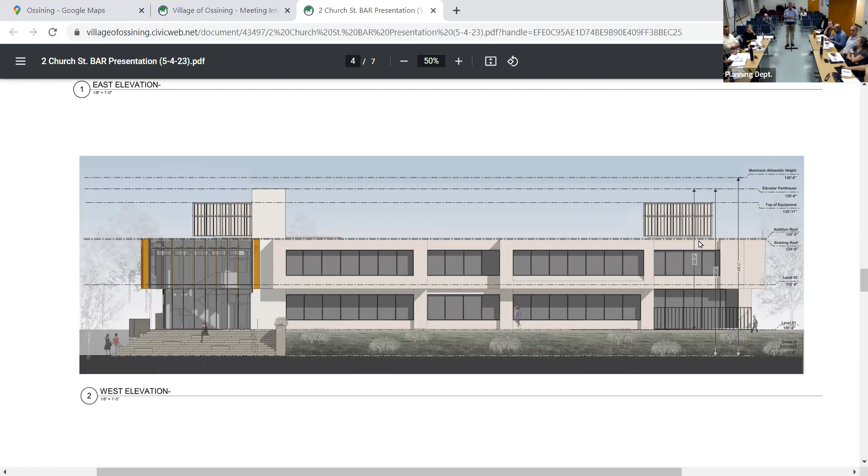Or those stairs are not - I guess they wouldn't be visible because they'd be concealed by one or two of the others, in the elevations that you've shown. Yes, they would be seen from the street, certainly the street level as you're walking - you would see them, at the setback.

Okay, board members, questions - I know we're kind of asking as we go, but is there anything else?

Yeah, we spent a lot of time on this. This was helpful. Based on what we were looking at last week and this week, I think it's a lot clearer. I think there's been a little bit of thought and design on it to make sure we understood this properly, especially with the closures.

So I guess, Tony or Valerie, I know that we've been through this - from the site plan perspective you've already asked your question, and we're in a good place there.

Linda, is there anything that we haven't gone over? The only thing is you had said about the landscape plan - I know that last time we had asked about that. Yep, if we could pull that up, Meredith Juliana is on and she can summarize for you the elements of the landscape plan.

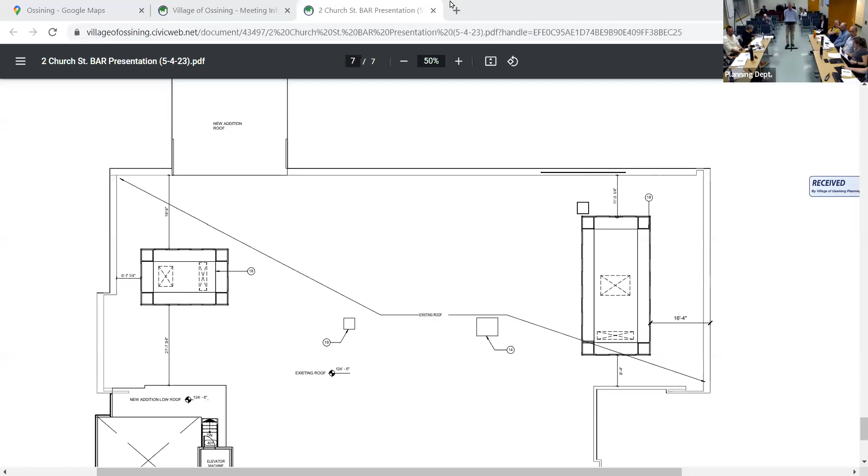Hi everyone, there's not an option to turn on a video. Otherwise I would turn mine on and say hi to you, but you'll have to just listen to my voice, I guess.

No problem, thank you. The last sheet - yeah, it's gonna be the last. There you go. Hard to move around on that page, huh?

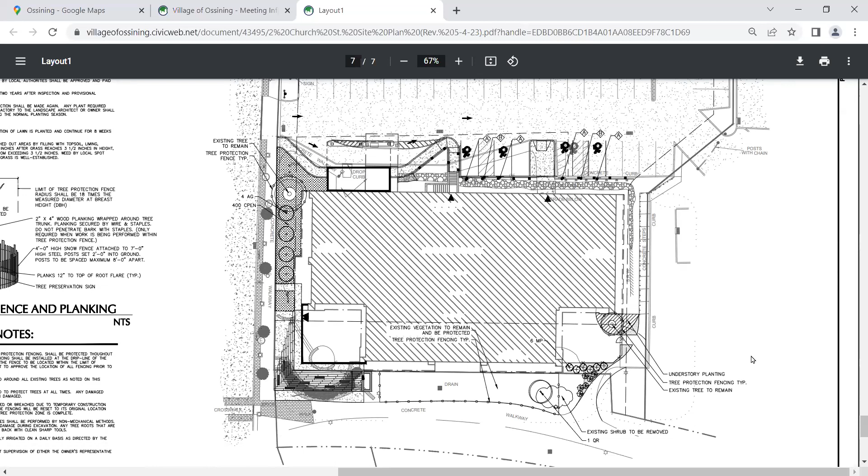So the overall concept of this landscape plan, our overall goal here, is really to be in keeping with the surrounding area. So in the front we have sort of two different ideas going on at one time. In the front, our objective is really to keep some of the formality, the repetition that happens with the street trees and the existing lampposts already along the sidewalk there.

This understory planting - we're keeping the large tree at the corner, and then proposing ornamental understory trees running along the front, keeping them in that very formal order in a row to mimic the street trees that are already there, with an understory of ornamental grasses. That's the front elevation idea, the exposed view of the building, versus the back area along the aqueduct trail.

Our goal here is really to keep as much of the existing vegetation as possible, so that will be the main objective along the building face. And then as you get back towards the patio area in the back, we're proposing some additional planting to offset where we're changing these paths around and the connection between the aqueduct and the parking lot. But all of those plantings lean towards the more informal understory woodland planting that exists in that area already, so those are much larger shrubs that will grow in and fill in that space nicely.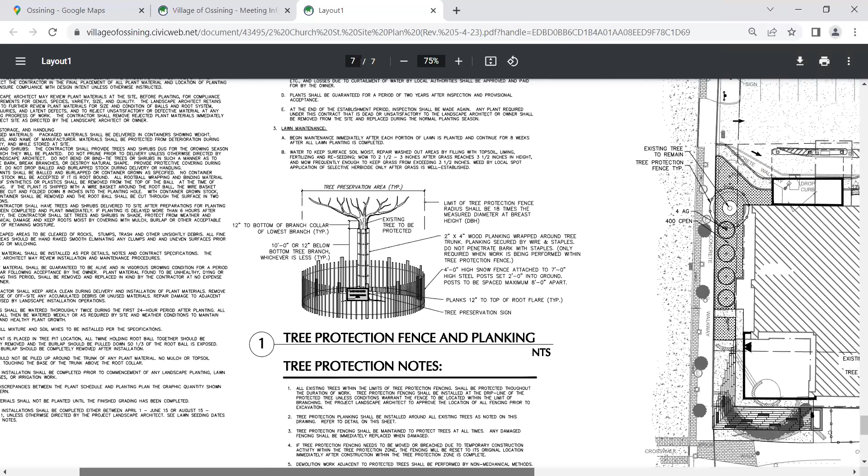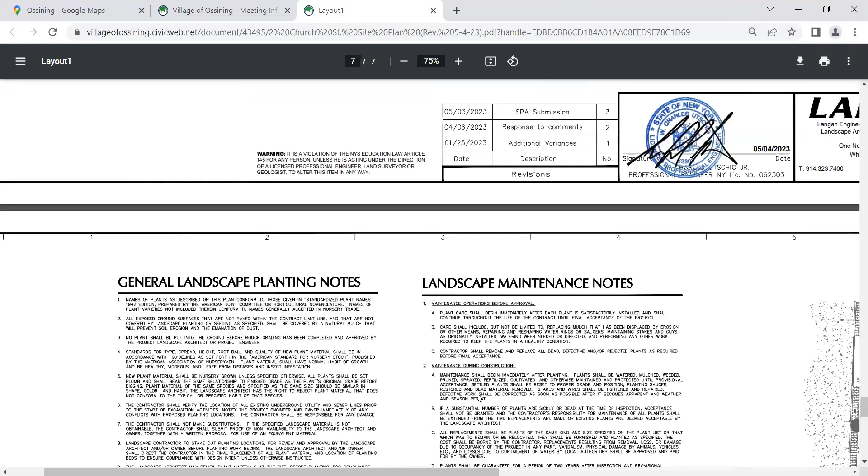So those are, sorry, they are Amelanchier. Blanking on what the English name of them is. How do I remember the Latin name? They're service berries. Sorry, there we go. Thank you, service berries. So they're an understory flowering tree, they have a white flower in the springtime.

All right, any other questions on this? All right, okay, so we did open a public hearing in our prior meetings, so I think at this point it would be appropriate to make the motion to reopen the public hearing. Michael Aronson, motion to reopen the public hearing. Any objections? No objections, the motion carries.

We're now in a public hearing. We'll ask if there's anybody here from the public to speak to this application in the room. I do not see any hands in the room. Put the hand up and you do the step back. All right, so bring that in.

Hello. Hello, how are you? Hi, I'm doing well, thanks. This all works. So I have one comment from the public, which is that I'm all for it. Sorry, before you start, just introduce your name. Oh, my name is Tess Belmont. I'm a resident of Ossining here. And this is my first town meeting or village meeting, and I'm happy to be here.

My comments on this proposal are really that I support Open Door, and I think this is all great, but the architecture and the design of it really seems to match more the potential development of the city rather than the historical character that currently exists. And I fear that by kind of swallowing up the aqueduct trail, by bleeding into it, you lose that definition and that character that we really cherish that makes this a really unique small town along the Hudson. If it's not too late, or if it's possible to request something that is a little bit more aesthetically charming and a little bit more old world, if you will, matching the architecture, which grants are being given out to local businesses to restore the historical character of that main street. So with this kind of facade, I think that goes against that whole idea and direction. That is my comment.

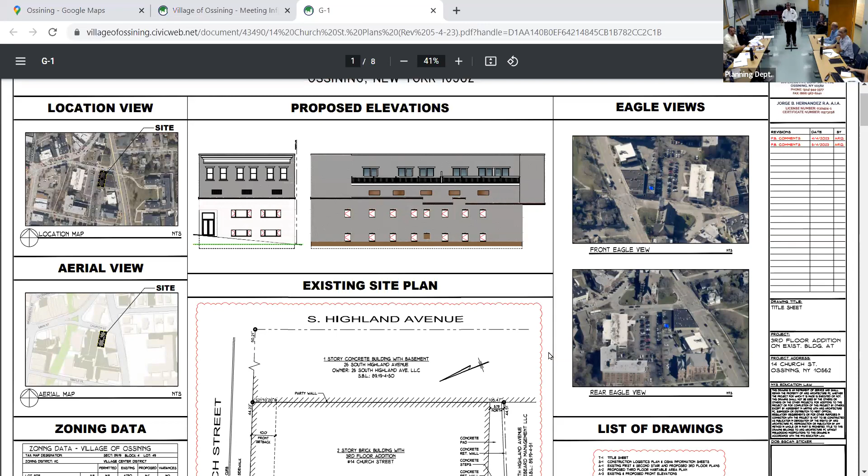So what we did now, moving forward, we took into account the adjacent buildings, A3.

Sorry, it's going a little slow. Oh, I'm sorry, it's not her. Making you all wait, need some music. I'll sing for you.

So that's what we kind of took from the adjacent building and some of the buildings down the street, also taking into account the construction budget and the financial implications. What we're doing is a stucco second floor, and some trim work that matches or goes more with the building down the street.

If you do the next one, A4, A5. A5 shows the accommodation with the adjacent building. So, I was hoping to get some input from the board.

Yeah, I think it's a big improvement from what you submitted last time. I like the changes and everything. Why doesn't the corner stand out more, why are there a lot of things broken in?

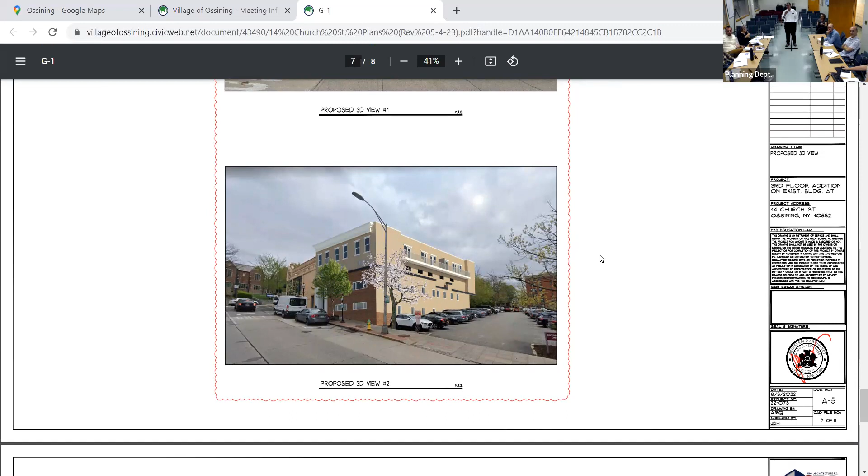Two things: one is the architecture, second is the location of the corners. It's okay to go on the front, but then they kind of line up right in the line, and it would be sharp. We were trying to return the corners at the front of the building architecturally, so there was a better finish to have a return. I'm with Michael, I think it looks odd that it doesn't go further out.

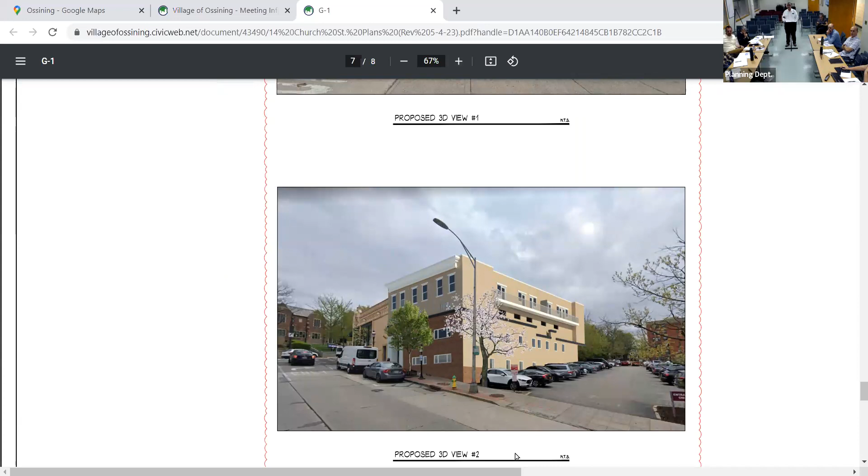Is that a lot line? Yeah, where is the lot line relative to that left wall? I think it's 0.3 or 0.4. So we can try to bring that and return it, make it a smaller corner when it returns.

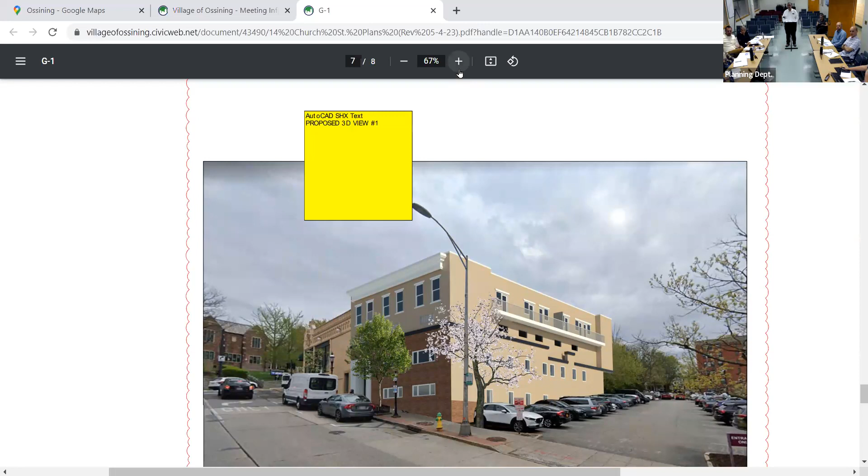Can you describe the relationship of that? Focus for a moment on the street facade - the stuff over the brick, is that projected out? Is there a shadow line? I was trying to understand how that transitions. When you transition from the stucco to the brick, is that volume cantilevered out past the brick facade?

There's a dark shadow in this image, yeah it is cantilevered, but very small. And how are you transitioning the materials? It seems very abrupt.

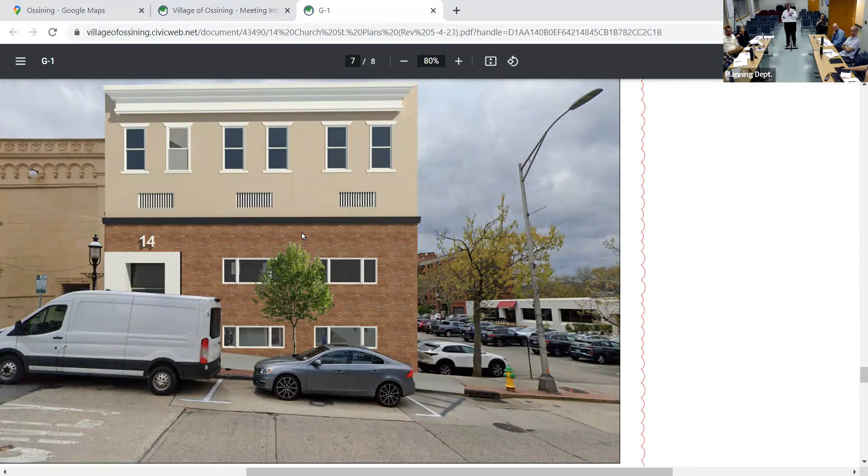The transition of the brick to the stucco, what's the transition point? Well right now there's like a band, when we paint the band. What's that material? Is that a coping, or what is it? Right now we have selected the metal cap and we haven't finalized that.

Right, because you're not gonna build up on top of that with coping, you're gonna take that coping off and build something there. That transition has to terminate the stucco at the base. You're gonna have to have some sort of cap and flashing detail between the two structures. So all of that's gonna read out on the facade, and from this image, I really don't understand what that looks like. It looks like you just placed this down on top of the brick.

I also think that we need some resolution there, and maybe part of that is looking at the brick - there has to be a more intentional transition there. Right now it's just ridiculous.

Well, I'd like to refer to the comments from the previous public hearing, the person who spoke. I still feel like this design is so flat. And if you even just look at the adjacent building and see the details on the roof line there, there's no relationship between those two properties as far as I can see from this rendering.

Are those the existing windows below? Is that what they look like now? Because that's, okay.

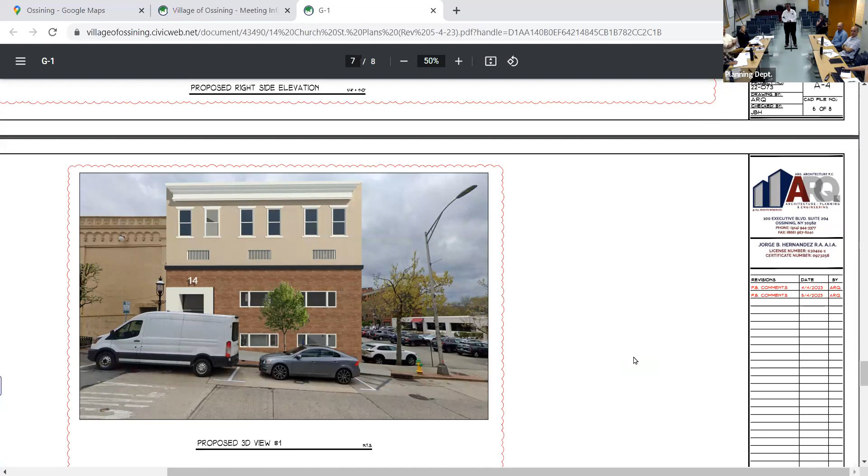And the balconies on the side elevation, it seems like one continuous line, there's no separation between them. Are people actually able to go out of their apartment onto those balconies, or are they more like to put a flower pot on? No, they're able to. So there's no separation between units in terms of access, it's just one long balcony.

You're not gonna put any kind of wooden railing? There is, I think, one out there. It's hard to see. Yeah, see there. And what would that be made of? Is it wood? We haven't decided what material, we'd probably do something like a metal railing.

I want to dig into what you're saying. The points that were made last week about relating to what's next door, and JB, you just said this yourself. We can go to that front elevation. It's not about historicism, right? It's not about taking an architectural element from a period in the past because you're next to an old building and making it look old. I think that image is super helpful for me because you see this kind of beautiful terracotta wall.

And you see this brick wall, which is what it was from its time, and you see a stucco wall. You have these three things that none of them have anything to do with the other. And I really worry how this will read, and whether that means there has to be some sort of setback, and whether the scale of the windows, the rhythm of the windows, could match something that's going on.

I don't know, I think we still need to see a little bit more work on this. Can we see the side elevation again with the balconies, please? No, that one, or no? Yeah, more something like that. Is there a view actually like from it?

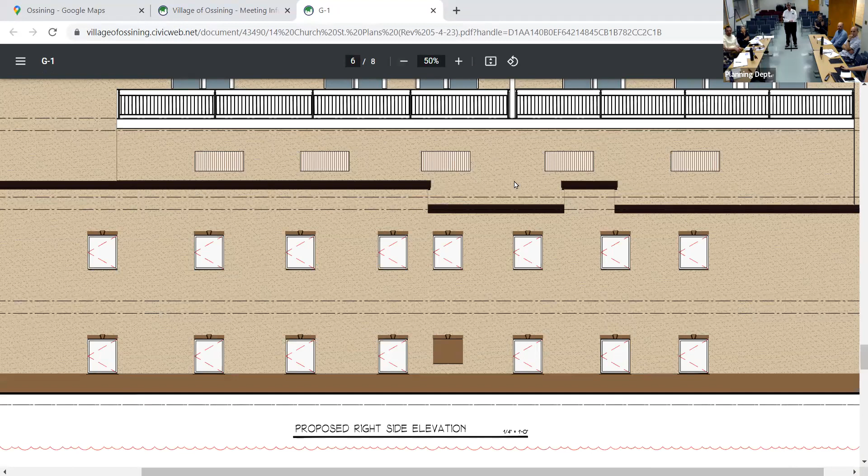So again, I'm confused—what's the material of the existing? It's brick, painted brick. It's painted that color? Yeah, it's the yellow, should go back to that. I was looking at that the other day and drove by quickly and just assumed it was stucco. It's a beige color, right? Yeah, it's a lot of beige.

So that black line is the existing coping of that brick wall. Yeah, I mean, it is the same—in some respects, this is almost going to be more prominent than that narrow facade on Church. This is overlooking the parking lot of the project we looked at earlier today.

I know we talked about that overhang before, but I can't remember if it's just the scale of the drawing—it's not that dramatic, or is it that dramatic? It is at an angle, so we'll show the rear wall as well. So it tapers, right? Yeah, it's basically a triangular shape in plan, so what you see is the worst case, up front.

But that larger overhang is on the parking lot side, or is it on the Route 9 side—can we look at the plan? It's on the rear of the building. I know it's the rear of the building, but you say the parking—I mean the parking lot for 14 Church.

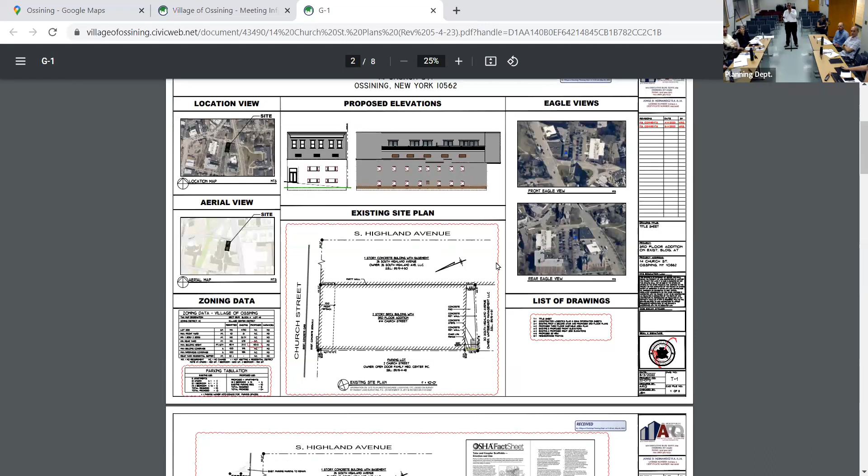Or for 2 Church—well, right now, if you look at the picture, it gets wider on the western end, and there's a gate right now or some sort of access. It diminishes slightly, but it gets a little narrower, not much. It's still a pretty substantial overhang—5.75 feet at its longest.

This goes along with our last comment—actually showing the proposed building on the site plan so you can see, because it's hard to relate where the balconies are protruding. You have the awning in the front protruding along the top—I just want to make sure that doesn't extend onto the neighboring properties.

Right, like a dotted line profile showing what's being added, a color diagram showing the balconies that come out even further, just to know the extent of the whole building's outer limits. It'd be helpful—I think it would also help the board understand how wide those balconies are.

I just would like to see... it's such a huge wall. I'd like to see something that breaks it up, whether it's a darker color and a little more detail between the different stories. I'm not sure what it is, but if you're coming up the hill, that's what you're gonna see. First you'll see the church, then you'll see this.

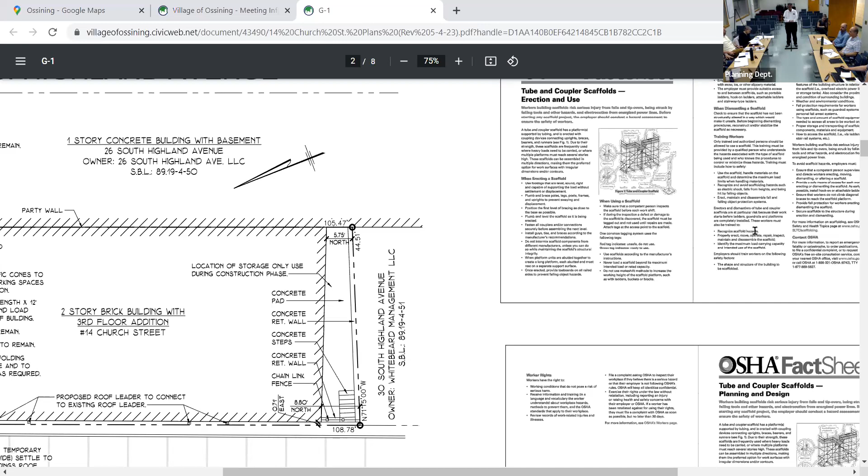I think these are all important, and they're related, right? Just like the mass of that facade is the same as we were talking about with the mass on the street, where you have these two totally different things, and then you turn the corner and you've got this big thing that's all one.

It's a large wall, how are you gonna break that up, right? Maybe there's an opportunity to break it up vertically, where you use a couple different materials to make it look like some smaller buildings. Maybe it's emphasizing that horizontal. I don't know what the answer is, but it's gotta be visually broken up to the point where it's not this giant wall that's just reflecting light down, imagine sunsets, if things reflect right down onto the parking lot below and create a glaring view.

And then on that street facade, the idea of taking an element like the brick and bringing it out, like you suggested, I think there may be something worth investigating. Looking at the windows on both of these and relating - the windows that are there, you're matching to those masonry openings. While they may not be the most beautiful windows in the world, is there a way to take something about them, some dimension of them, and carry that upstairs? So there's a way of speaking to each other, and then letting the building next door exist without just kind of cramping it out.

I think you feel like you have enough feedback now to come back to us with. Okay, and we do recognize that your client's working under a budget and that you can't do everything, but we think that there's more that you can do.

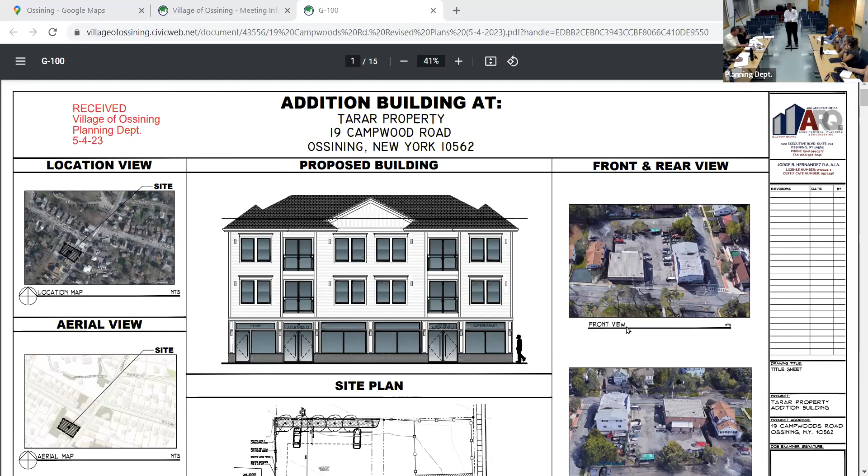Some of the information we provided was in response to comments, and we're going to submit a more complete package. But for the neg dec, what's missing right now that prevents a decision? It's just making sure everyone on the board voting has time to read through the large document to make it at the proper level. I don't foresee any issue — it's nothing other than making sure we have the proper level of review. If it were more urgent given the project's timeframe, it would be a little different.

Are there any other substantive issues to deal with between you guys? We'll get an updated memo before the next meeting, and then we can have that conversation.

We have a motion to open the public hearing on site — Michael Aronson motions to open the public hearing, seconded. Any objections? None — we are in public hearing.

There is nobody in the room to speak. Are any attendees present here to speak to this application? If so, use the hand raise function. I do not see anybody raising their hand, so we have a motion to adjourn the public hearing.

That's how it is — I make a motion to adjourn.